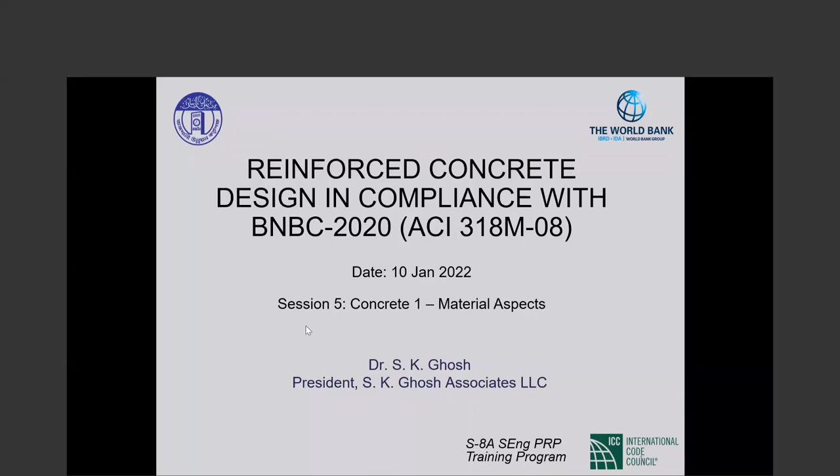Good evening once again. It's 8:05, so let us start. Bodhi has already provided a bit of an introduction, so I'll go forward. He pointed out that the date is 11th of January, not 10th. We had to make some adjustments at the beginning of the program due to circumstances beyond our control. Today is the fifth offering in the series, and we are starting with our reinforced concrete courses. This is a two-part course. I'll talk about the material aspects of concrete and then go on to strength design, the principles of strength design, what it is that we do when we do strength design of concrete.

The ingredients of concrete, as you all know, are cement, sand, stone, and water. Those are the basic ingredients. But for a long time now, we also have admixtures in concrete.

Admixtures used to be classified as mineral admixtures and chemical admixtures. Mineral admixtures will be something like blast furnace slag or fly ash. Those are now called supplemental cementitious materials, and the chemical admixtures are called admixtures. Cement plus the supplemental cementitious materials are called cementitious materials. So what used to be water-to-cement ratio is today water-to-cementitious-materials ratio. However, the code we are talking about, BNBC 2020, as pointed out earlier, is based on ACI 318-08. Back then, it was still water-cement ratio, and that is the terminology you will see as we go forward.

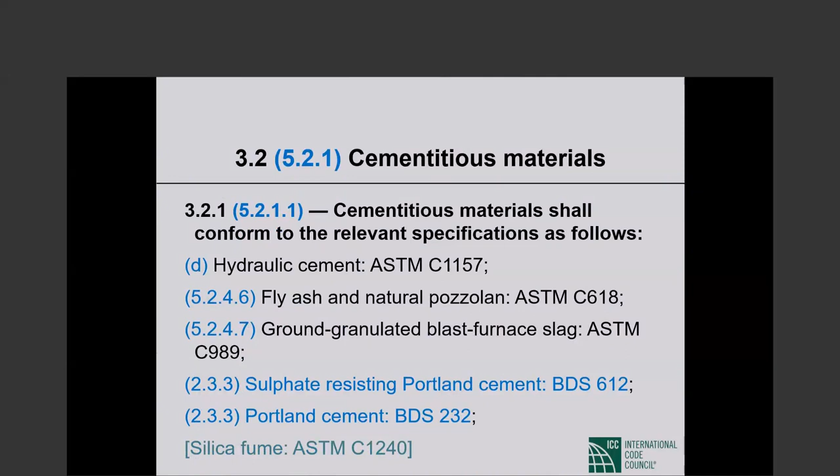So: Portland cement, then blended hydraulic cement C595, hydraulic cement C1157, and the mineral admixtures, among which fly ash, natural pozzolans, and ground granulated blast furnace slag. This is what we are dealing with for concrete making.

The BDS 197 cement comes theoretically, at least, in 5 varieties. CEM 1 is Portland cement, CEM 2 is Portland composite cement, CEM 3 blast furnace cement, CEM 4 pozzolanic cement, and CEM 5 composite cement, meaning cement and pozzolan together. Dr. Akif tells me that pretty much all cement used is CEM 1 and CEM 2. CEM 3 has been used in nuclear power plants, and 4 and 5 are basically not used.

C150 Portland cement — this is the American standard followed throughout the United States and in some parts of the world. C150 cement also comes in 5 types: type 1, type 2, type 3, type 4, type 5. Type 1 is normal, type 2 is moderate sulfate resistant — very important; if there is sulfate in the soil, you may want to go for type 2 cement. Type 3 is high early strength; the name tells you what it is.

Type 4 is low heat of hydration. As cement reacts chemically with water, there is heat generated, and that may cause problems depending on what you are doing and how you are curing the concrete. So in applications like mass concrete, low heat of hydration may be an attraction. And then type 5 is high sulfate resistance — when type 2 Portland cement won't do, you need type 5, with high sulfate resistance.

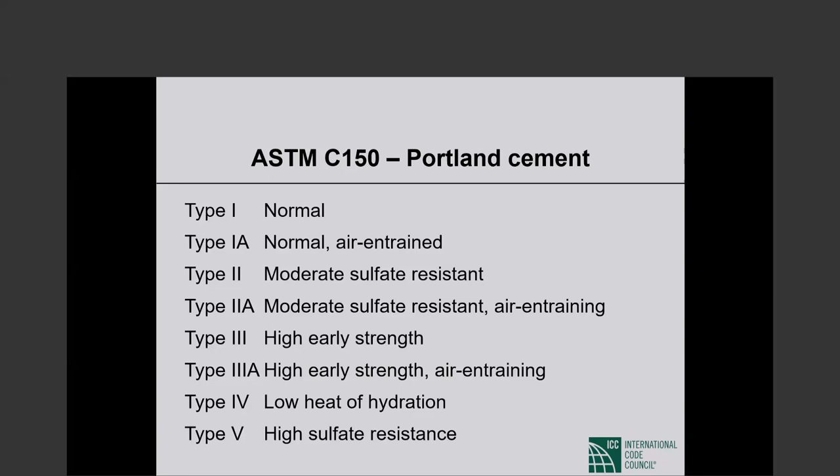That typically is done by adding air entraining admixtures to the concrete mix, but sometimes air is entrained in the cement itself at the cement plant, and that gives us the type 1A, type 2A, and type 3A Portland cements. You don't have to worry about air entrainment to the best of my knowledge.

The blended cements C595: type 1S, which is Portland blast furnace slag cement, and 1P, Portland pozzolan cement. If you have 1S parenthesis 50, that means the blended cement contains 50% slag by mass. And if it is a 1P cement, then within parentheses you may have A for air entraining, MS for moderate sulfate resistant, and so forth. So C595 blended cement is type 1S or 1P with additional information conveyed through the labeling.

1157 hydraulic cements - this is relatively new. C150 goes back a long way, then came 595, and then 1157 is relatively recent.

This is also called a performance spec, meaning the ingredients and so forth are not pinned down, but what properties the cement will deliver is emphasized. So hydraulic cement C1157 can be type GU, general use, HE, high early strength, MS, moderate sulfate resistant, HS, high sulfate resistant, MH, moderate heat of hydration, LH, low heat of hydration. So this kind of mirrors the varieties of C150 Portland cement that we have.

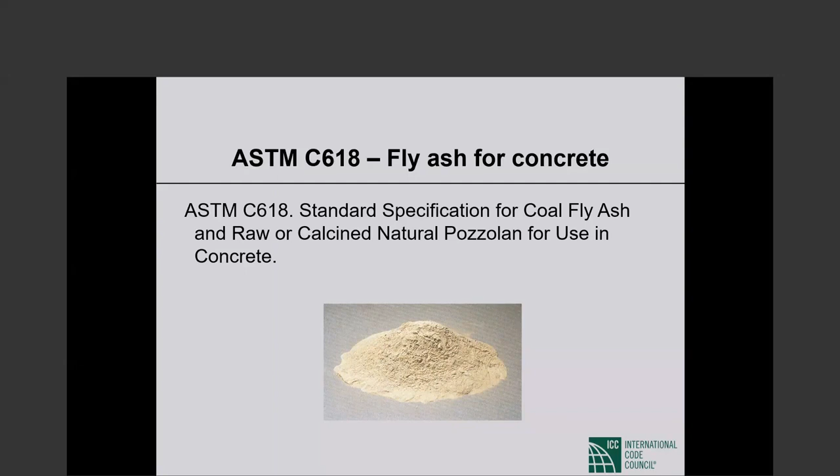Fly ash is probably the most common mineral admixture used in concrete. Fly ash gives the concrete a very dark color, but fly ash itself is not dark, as you see in the picture. The fly ash that you use must comply with ASTM C618, the spec for coal fly ash and raw or calcined natural pozzolan for use in concrete. So C618 for fly ash.

Ground granulated blast furnace slag, again a pretty popular mineral admixture or supplemental cementitious material. The applicable ASTM standard is C989, standard specification for slag cement for use in concrete and mortars.

Both documents state that cementitious materials used in the work, meaning the project, shall correspond to those used as the basis for selecting concrete mixture proportions. So you proportion your mix assuming you are going to use certain supplemental cementitious materials. On the project, you have to use exactly those materials, not something close to those, etc. I think this is understandable upon reading, but this is very, very important.

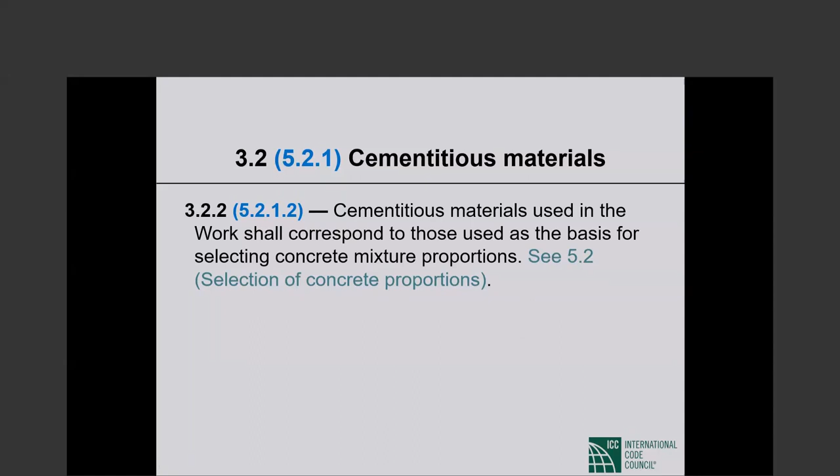Whenever we have text on the slide in this color, that means it is ACI 318 text that does not appear in BNBC 2020.

We go from cement to aggregate. Concrete aggregate shall conform to one of the following specifications. BNBC 2020 says coarse and fine aggregate shall comply with BDS 243 - coarse and fine aggregate from natural sources for concrete.

The US specification for normal weight aggregate is C33, and for lightweight aggregate it is C330. So C33 is normal weight aggregate, C330 is lightweight.

BNBC has an exception that reads: aggregates that have been shown by special test or actual service to produce concrete of adequate strength and durability, and approved by the building official, do not have to comply with ASTM C330. In other words, you may use lightweight aggregate that is not in compliance with C330 if, as the exception says, it has been shown by special test or actual service to produce concrete of adequate strength and durability, and it has been approved by the building official.

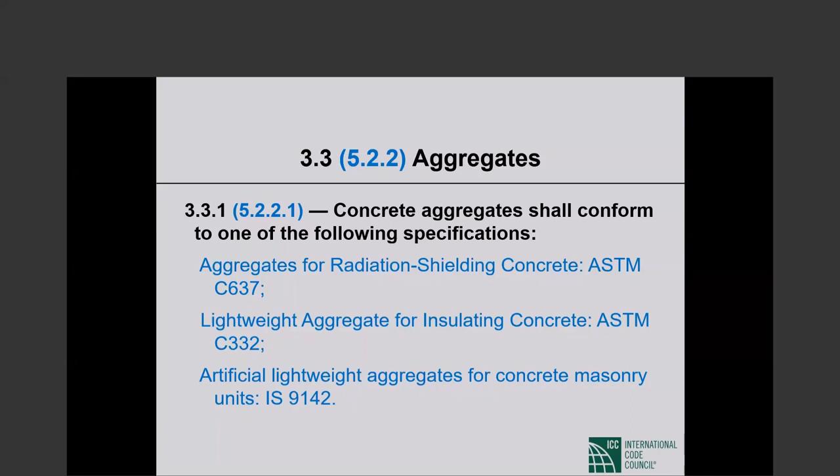I realize that this is not exciting stuff, but these things are important. All the ingredients of concrete have to comply with applicable standards and specifications.

The next slide also has something extremely important. Nominal maximum size of coarse aggregate shall not be larger than... Nominal maximum size - nominal means it is not the measured number, it is what it is claimed to be. So a nominal 3/4 inch aggregate may be smaller when you actually measure its size.

A nominal maximum size of coarse aggregate shall not be larger than 1/5 the narrowest dimension between sides of forms, 1/3 the depth of slab, and 3/4 the minimum clear spacing between individual reinforcing bars or wires, bundles of bars, individual tendons, bundle tendons, or ducts. Tendon would be pre-stressing steel strand, things of that kind.

The whole purpose of this is so that concrete can be placed and there will not be voids in the completed structural member. This is extremely important - if your stone pieces are too big, then voids may very well be created in the concrete because the concrete does not flow, it does not fill all the gaps that need to be filled. So 1/5 the narrowest dimension, etc.

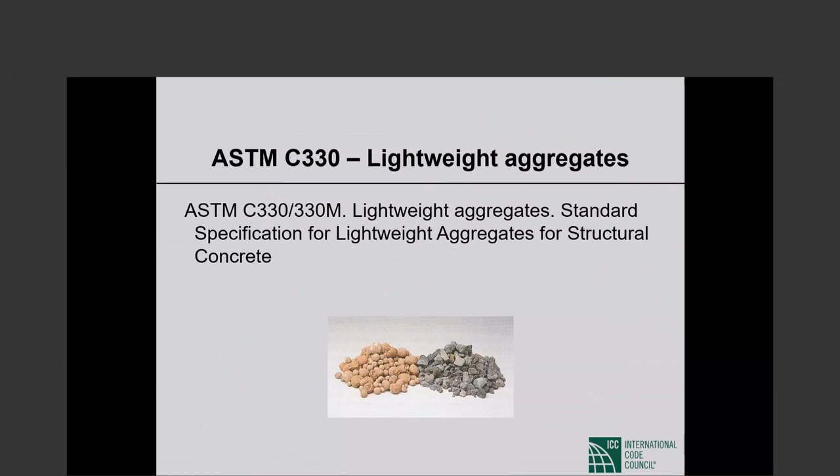C330 is the standard or specification for lightweight aggregate. The full title is Standard Specification for Lightweight Aggregates for Structural Concrete.

Mixing water for concrete is more important than anyone would think. I would say it's extremely important that the water used in mixing concrete be non-problematic water. We now have an ASTM C1602 specification, which is relatively new. I suspect that when ACI 318-08 came out, that specification was simply not available yet.

So that specification is not cited in BNBC 2020. BNBC 2020 says mixing water for pre-stressed concrete, or for concrete that will contain aluminum embedments, including that portion of mixing water contributed in the form of free moisture on aggregates, shall not contain deleterious amounts of chloride ion. So free moisture on aggregates counts as mixing water, which is important. How much chloride is deleterious is given in both BNBC and ACI 318-08 - for that you have to go to section 5.3.3.

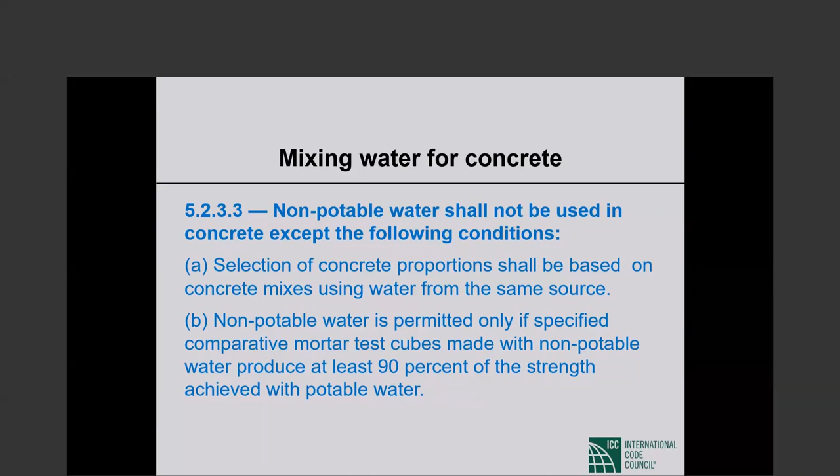What is on this slide, I would emphasize, is extremely important. And item A is also important: selection of concrete proportion shall be based on concrete mixes using water from the same source.

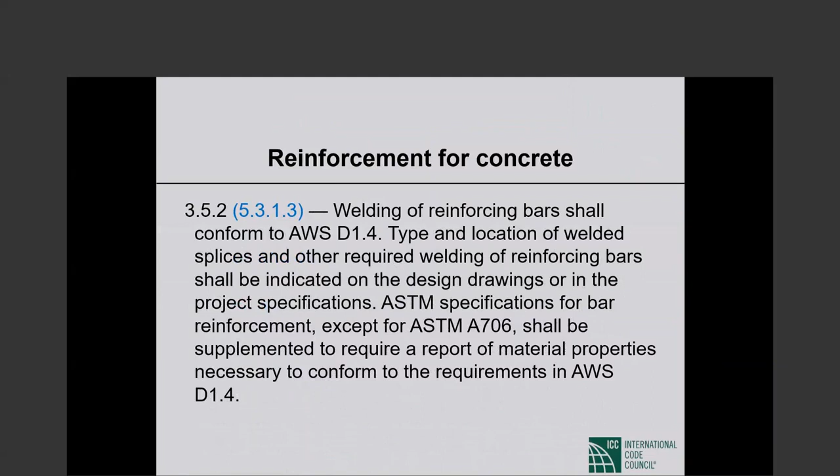Now we go on to reinforcement for concrete. The first item is not reinforcement itself, but welding of reinforcement. Welding of reinforcing bars shall conform to AWS, the American Welding Society, D1.4. I'll let you read the rest of it - it gets a little too much.

Anyway, deformed reinforcement - that's what we always basically use. There used to be plain reinforcement a long time ago, but that has now been discontinued for quite a while, so all reinforcement is deformed reinforcement. The deformations are those ribs that you see on reinforcing bars - it's also called ribbed bars, the deformed bars.

So deformed reinforcing bars shall conform to the requirements for deformed bars in one of the following specifications. The specifications in Bangladesh are BDS 6935-1 and BDS 6935-2. -1 is plain bars, so those are not used; -2 are deformed bars, those are the ones used. So just as I remarked about cement, about reinforcement, basically all reinforcement used in Bangladesh, I understand, is BDS 6935-2.

Now in the US, the vast majority of reinforcement is ASTM A615, but particularly in seismic applications, and increasingly, we have A706 reinforcement. The difference between the two is that A706 is weldable reinforcement, while A615 is not - A615 reinforcement requires special treatment if we are going to weld it. The ingredients of A706 are also tied down much more strictly than those of ASTM A615. So ASTM A615 is standard billet steel, and A706 is weldable reinforcement.

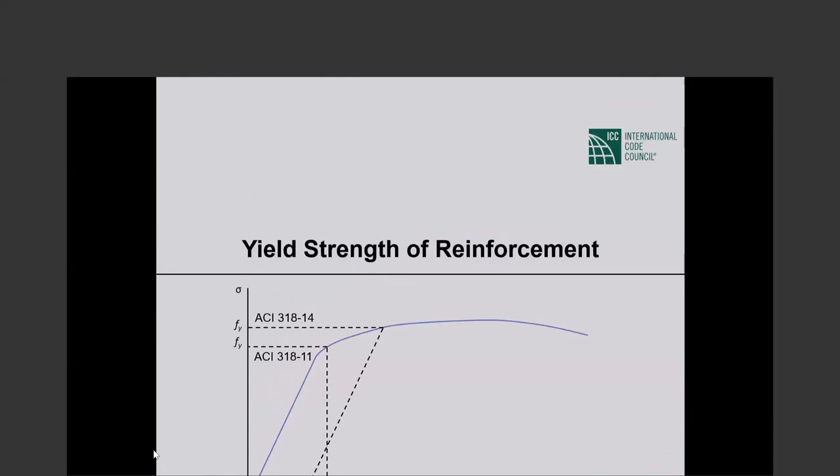So when the yield strength exceeds 60 ksi, the yield strength shall be taken as the stress corresponding to a strain of 0.35%. This change of definition of yield strength becomes important in certain applications, and it may come up in later discussions, but that is not the subject today. However, I do want to point out that this change of definition is made. Yield strength means different things for reinforcing steel up to 60 ksi yield strength and reinforcing steel with yield strength larger than 60 ksi.

Then, in addition to bars, there are bar mats for concrete reinforcement. The applicable ASTM standard is A184. When I have M following the standard number, that simply means metric. Reinforcing bars used in bar mats shall conform to 615 or 706, the two US specs for reinforcement.

Now we go from bar to wire for reinforcement. Deformed wire for concrete reinforcement shall conform to A496. BNBC says shall not be smaller than size D4. I will talk about wire size on the next slide. Shall not be smaller than size D4, which has a nominal diameter of 5.72 millimeter.

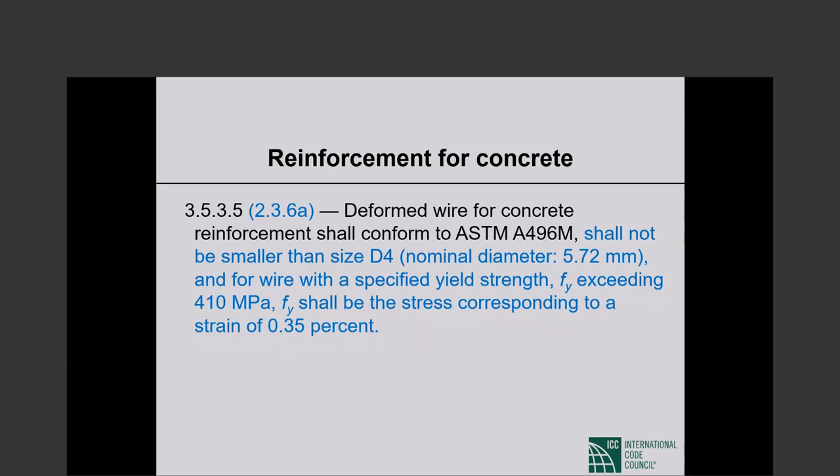Now, wire size, when we say D4, what does it mean? Individual wire size designations are based on the cross-sectional area of a given wire. M stands for metric, W represents plain wire, and D represents deformed wire. The number following the W and the D represents the cross-sectional area of the wire in millimeters square. So D4 means deformed wire having a cross-sectional area of 4 square millimeters. A D10 wire would indicate a deformed wire having a cross-sectional area of 10 square millimeters. So keep that in mind when you come across wire sizes.

Then there is what used to be called welded wire fabric. Now it is called welded wire reinforcement. People who manufacture these do not like the term fabric. Now it is welded wire reinforcement.

So welded wire reinforcement may be made of plain wire or deformed wire. Welded plain wire reinforcement shall conform to ASTM A185, except that for wire with high strength exceeding 60 ksi yield strength, the definition of yield strength changes. Welded intersections shall not be spaced further apart than 300 millimeters, 12 inches, in direction of calculated stress, except for welded wire reinforcement used as stirrups. So there is a maximum spacing between the cross wires, no more than 12 inches.

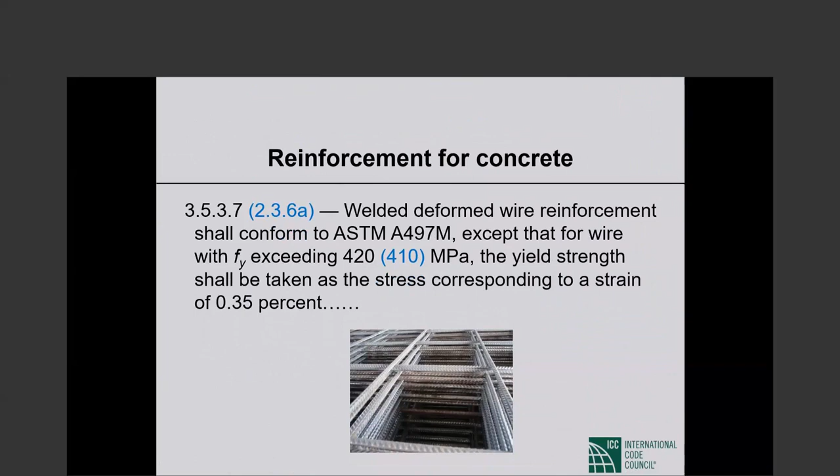Welded deformed wire reinforcement, the spec is A497. Again, the definition of yield strength changes when yield strength exceeds 60 ksi. Welded intersections shall not be spaced further apart than... so if it is plain wire reinforcement, the cross wires cannot be further apart than 300 millimeters. For deformed wire, it is 400 millimeters.

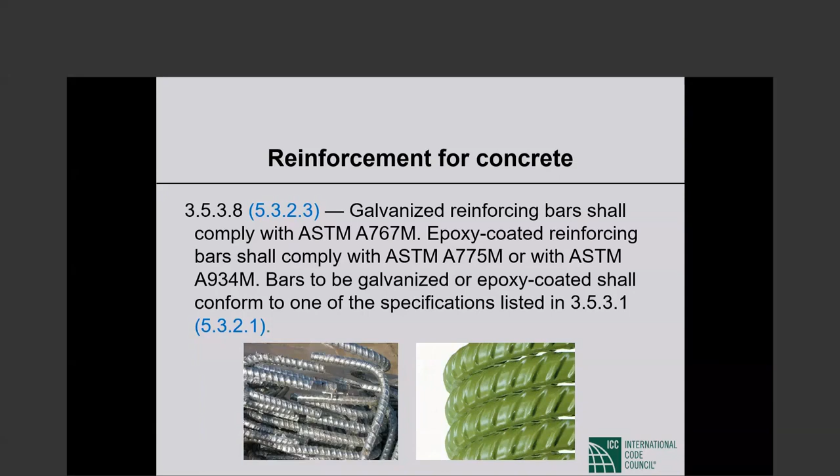Then there is galvanized reinforcing bars, A767. Galvanized means zinc coated, which gives protection against corrosion. There's also epoxy coated reinforcement, A775. Epoxy coating is very popular in highway construction for pavements, and in Bangladesh, apparently in coastal areas for basements and similar structures because of the high risk of corrosion.

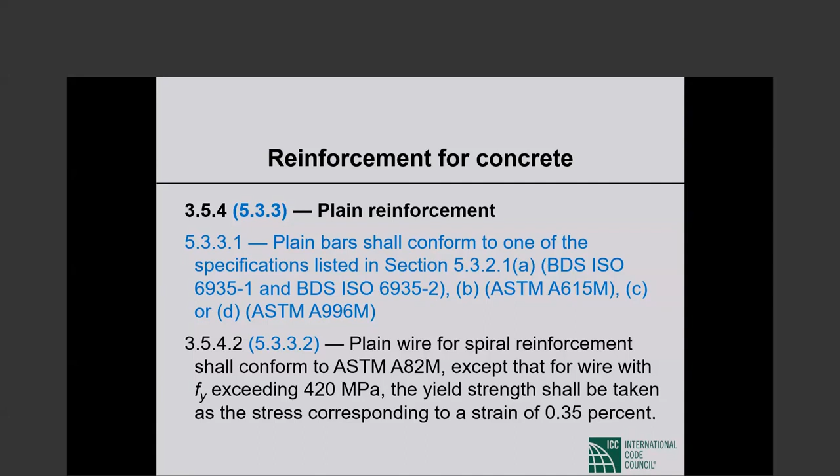Plain wire for spiral reinforcement shall conform to ASTM A82, except that for wire with Fy exceeding a certain value, that definition of yield strength change repeats itself.

This is something I will mention because I consider it extremely important. At some point, I don't remember which module, we will talk about flat plate design. Flat plate is a reinforced concrete slab supported directly on columns. There are no column line beams. Also, there is no local thickening of the slab on top of the columns - those thickenings are called drop panels. Further, there are no column capitals - the column tops are not flared to give us a larger column area at the top. So it is a slab supported directly on columns without any drop panels or column capitals.

In the design of that type of slab, the critical thing is punching shear, two-way shear as opposed to one-way shear, commonly referred to as punching shear. When punching shear stress is beyond the punching shear stress carrying capacity of the concrete, we use punching shear reinforcement, and the most popular kind are now headed studs.

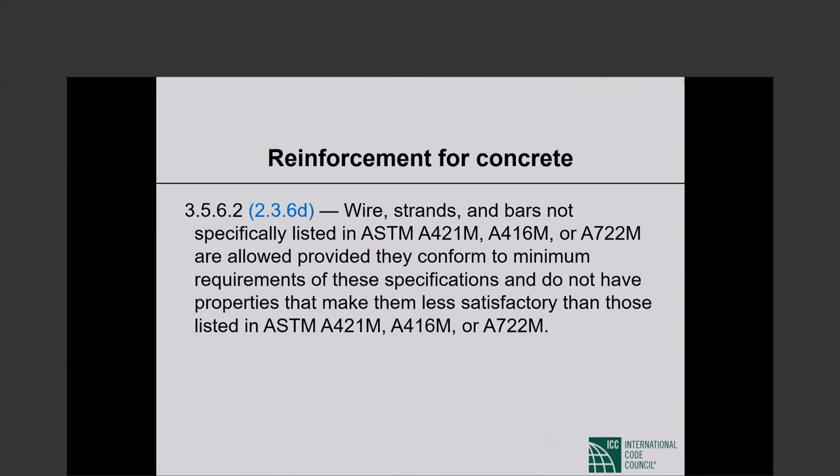Then beyond reinforcing steel and pre-stressing steel, there are times when we use structural steel in concrete, steel pipes, or tubing, and there are specifications given. I don't think I need to or want to take time over those. Those are not common applications, but there are times when you do use structural steel, steel pipe, and tubing in concrete. If you do, there are ASTM specs governing their use.

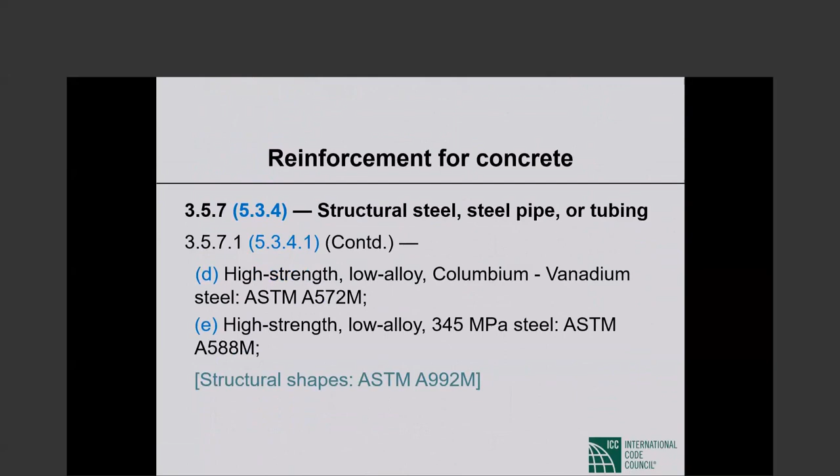Continuing with structural steel, steel pipe or tubing - again, I don't think that I want to spend time on those items, you can look them up. I do want to spend a minute or so on this, as I did on the headed stud shear reinforcement. The color indicates to you that this is in ACI 318-08, not in BNBC 2020.

Steel discontinuous fiber reinforcement for concrete is recognized in ACI 318 as shear reinforcement under very tight controls. This is an increasingly important item, in my opinion, that you should be aware of. Other types of fibers, like carbon fibers, are not recognized by 318.

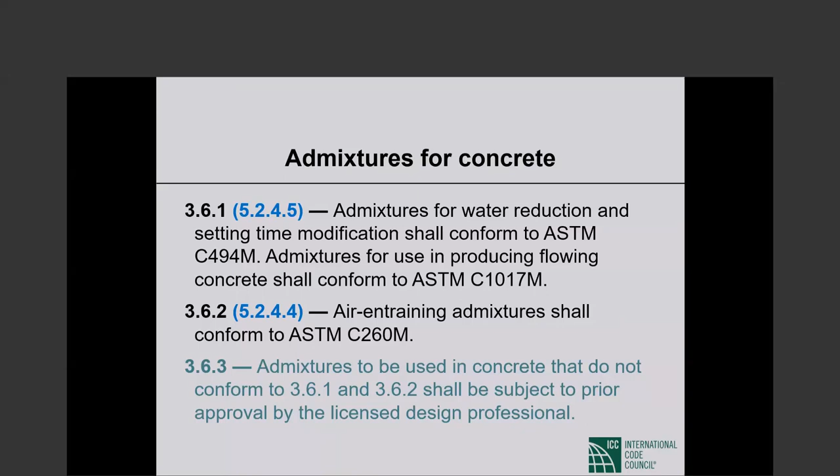Admixtures to be used in concrete shall be subject to prior approval. ACI doesn't require this, but BNBC does. Admixtures shall be subject to prior approval by the building official and conform to the following standards: BDS EN 934-1 or BDS EN 934-2.

Fly ash or other pozzolans won't be called admixture today, it's mineral admixture now, supplemental cementitious material. The spec is C618. Ground granulated blast furnace slag is also cementitious material, ASTM C989. Pigment for colored concrete is C979. BNBC cites those under admixtures for concrete.

Calcium chloride: admixtures containing chloride from sources other than impurities in admixture ingredients shall not be used in pre-stressed concrete, in concrete containing embedded aluminum, or in concrete cast against stay-in-place galvanized steel forms. This is extremely important. Wherever you have potential corrosion, where you absolutely need to make sure there will be no corrosion problem, you have to avoid calcium chloride in your admixtures.

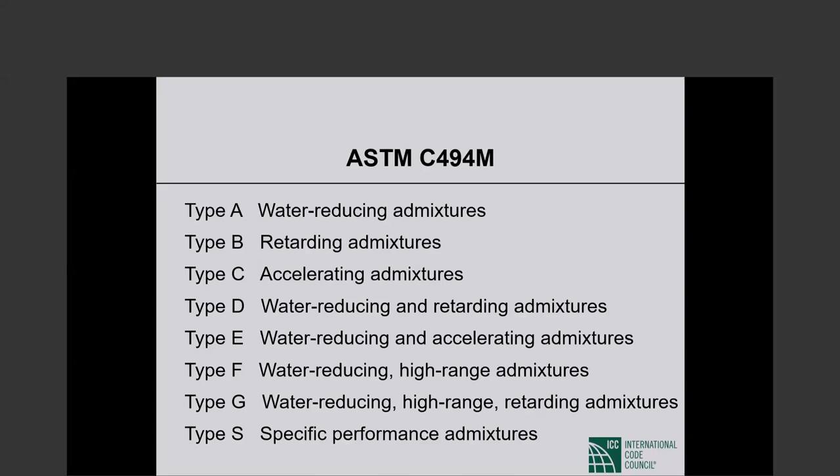High range means it gets close to what was called the self-consolidating or flowing concrete, giving you kind of flowing concrete. So water reducing high range admixtures, water reducing high range retarding admixtures, and then specific performance admixtures: A, B, C, D, E, F, G, and S, various types of C494 admixtures used.

BNBC cites BDS EN 934-1. Those are admixtures for concrete, mortar, and grout; Part 1 is common requirements. EN 934-2, admixtures for concrete, mortar, and grout, Part 2, talks about concrete admixture definitions, requirements, conformity, marking, and labeling.

Storage of materials: cementitious materials and aggregates shall be stored in such a manner as to prevent deterioration or intrusion of foreign matter. Storage is extremely important, preventing deterioration and intrusion of foreign matter. These things, when you read them, don't seem like much, but they are very, very important requirements.

Durability requirements are again extremely important. Durability is like longevity in people: how long is your concrete going to last, how long is it going to be serviceable and serve the purpose for which it was installed. For concrete intended to have low permeability, so-called watertight concrete, when exposed to water, the water cement ratio shall not exceed 0.5.

When we talk about durability, there are typically four aspects. Freeze-thaw resistance, which is kind of moot in Bangladesh, so you have three considerations: resistance to sulfate attack, water tightness or permeability, and corrosion protection. So sulfate resistance, corrosion protection, and permeability or lack of it, impermeability.

Those are the three considerations. So BNBC starting with watertight concrete, intended to have low permeability when exposed to water. What you need to do is keep the water cement ratio—today it would be called water cementitious materials ratio, and I think that's the way you should practice it, because that makes more sense—shall not exceed 0.5. That is a pretty generous number, not a very tight restriction.

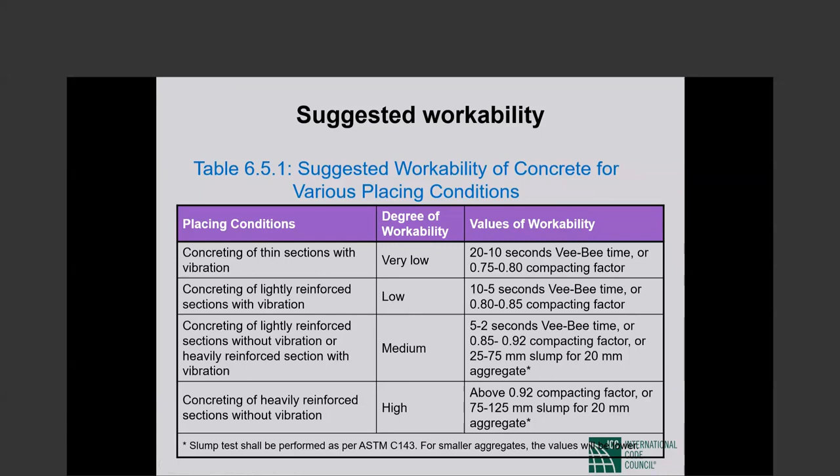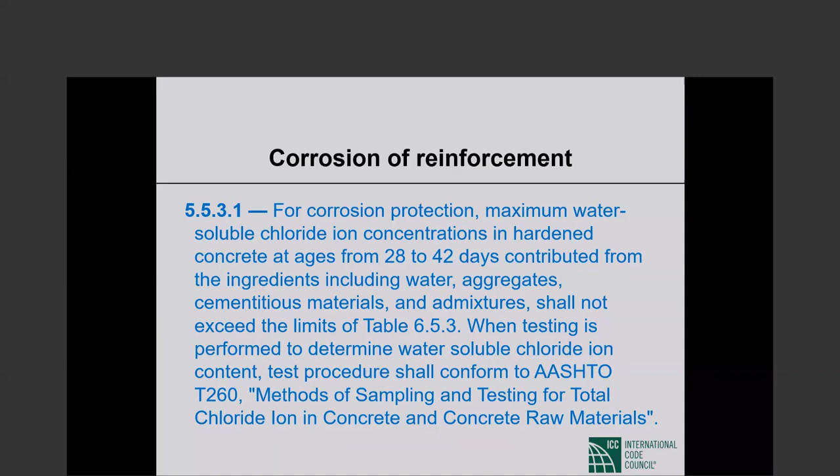There is a corrosion problem in most of the country, particularly in coastal areas. Chlorides cause the corrosion, and the chlorides from all sources have to be severely limited. When testing is performed to determine water-soluble chloride ion content, the test procedure shall conform to AASHTO T260, that I had in mind when I was talking a minute ago.

When reinforced concrete will be exposed to brackish water, seawater, or spray from these sources, requirements of section 5511 and 5512—the first two things I showed you for water cement ratio or concrete strength—apply. So if your concrete is going to be exposed to brackish water, seawater, or spray, there is a limitation on water cement ratio that we went over; I am not going to spend the time going back over it. There is also a minimum cover requirement in section 818, chapter 8, which we will come to. So both are required: the limitation on water cement ratio and adequate cover on reinforcement. The maximum chloride ion content, as I said, is given in a table, and this gives you the maximum chloride ion content depending upon your application.

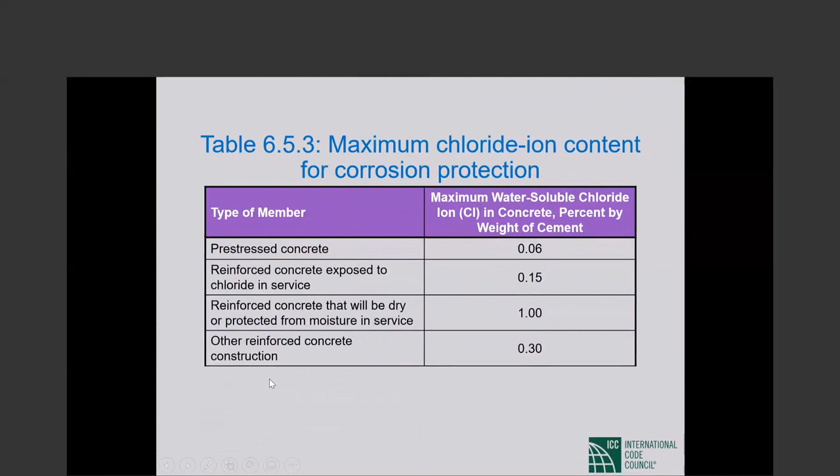The minimum concrete strength I mentioned for structural use of reinforced concrete is not particularly for corrosion protection—this is across the board. Minimum concrete strength for structural use of reinforced concrete in BNBC is 20 megapascal, Newton per square millimeter. That's about 3000 psi. However, for buildings up to 4-story, the minimum concrete strength may be relaxed to 17 megapascal, about 2500 psi. So those are the very minimum concrete strengths.

In IBC, it is 2500 psi across the board. We don't go up to 3000 except in some cases, like corrosive environments. This is important stuff for Bangladesh, which is why I kept it here.

The cover that was being referenced from earlier: if a thickness of cover for corrosive environment or other severe exposure conditions greater than the concrete cover specified in such and such section is required, such greater thickness shall be specified. So there are standard cover requirements in 8171 to 8176, but if a greater thickness is required for corrosive environments or severe exposure, that greater thickness shall be specified.

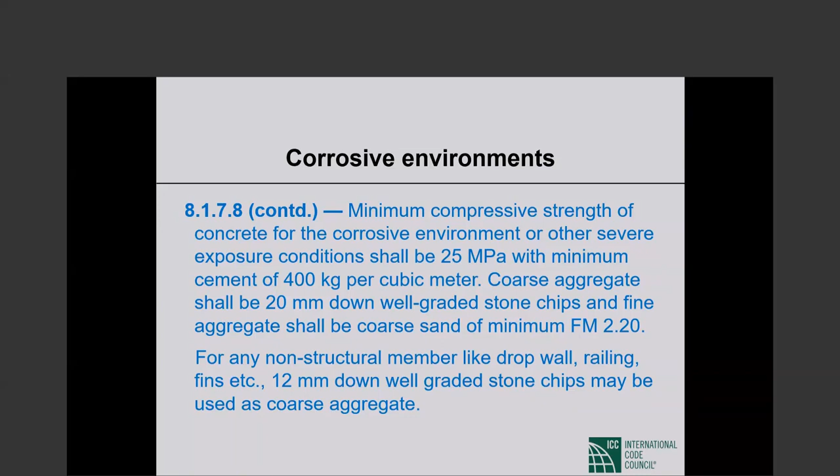Coarse aggregate shall be 20 millimeter down. I'll let you read the rest because all the details won't register, but it's extremely important that you have these requirements on the books, and following them is in your interest. Use of brick chips as coarse aggregate is strictly prohibited for corrosive environment or other severe exposure conditions. Water cement ratio shall be 0.4 to 0.45. Potable, drinkable water shall be used for all concreting—that exception goes away in corrosive environments.

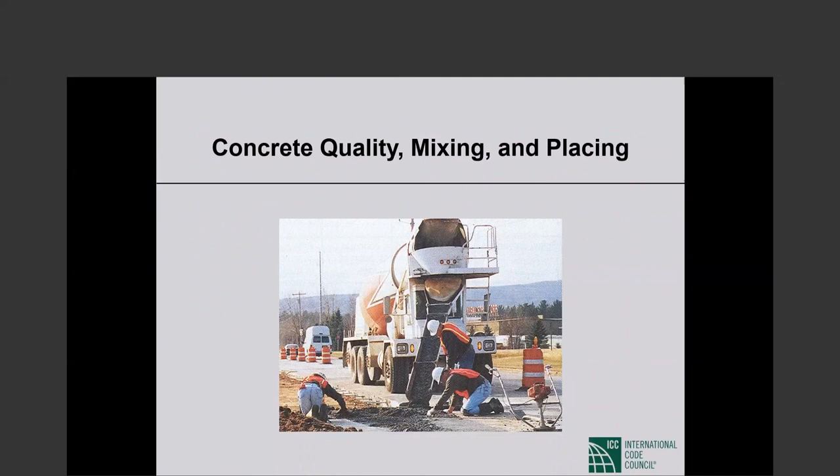Okay, concrete quality, mixing and placing. I think I'm beginning to run late, so some of this stuff probably...

Anyway, concrete shall be proportioned to provide an average compressive strength. So if specified compressive strength is 20 MPa, whatever, you have to set a required strength that is higher than that—that would be F sub C R prime, R for required. Concrete shall be produced to minimize the frequency of strength tests below F sub C prime, which is the specified value.

So you will set a target value for proportioning that is higher, F sub C R prime. The idea is that concrete shall be produced to minimize the frequency of strength tests below F sub C prime. For concrete designed and constructed in accordance with the code, F sub C prime shall not be less than 17 MPa, which we have seen before.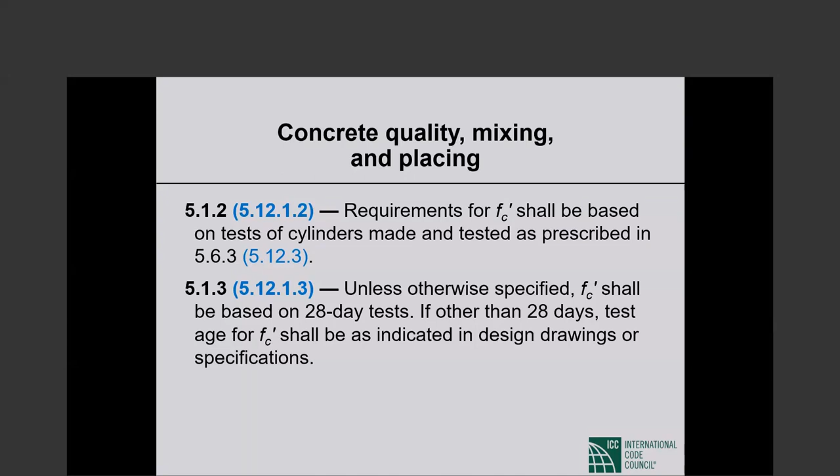The requirements for F sub C prime shall be based on tests of cylinders made and tested as prescribed—there's a section that tells you about the cylinder size and so forth. Unless otherwise specified, F sub C prime shall be based on 28-day tests. If other than 28 days, the test age for F sub C prime shall be as indicated in design drawings or specifications. That's a choice the engineer has, but if you want strength at 42 days rather than 28 days, that has to be on your drawings or specs.

The only thing in BNBC carried over from 318 is that splitting tensile strength tests shall not be used as the basis for field acceptance of concrete. It has to be compressive strength, not the split tensile strength.

Proportions of materials for concrete shall be established to provide workability and consistency to permit concrete to be worked readily into forms and around reinforcement under conditions of placement without segregation and bleeding, and to meet requirements for applicable exposure categories of chapter 4 - the durability requirements. So you have to comply with strength requirement, durability requirement, but you also have to think of workability - the concrete has to be able to go where it needs to go. That is extremely important. Workability, durability considerations, and strength - all three are important in proportioning.

Where different materials are to be used for different portions of proposed work, each combination shall be evaluated. Concrete proportions shall be established. So you can proportion concrete on the basis of field experience or trial mixtures or both, or you can proportion concrete without field experience or trial mixtures, and it shall meet the applicable requirements.

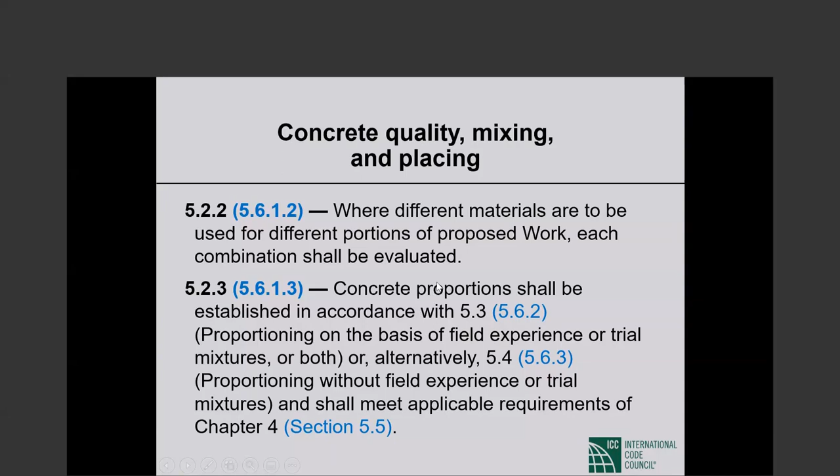All of this stuff has now been deleted from ACI 318, but it used to be in older editions, and they are in BNBC 2020. We have deleted them from 318 because the engineer does not typically deal with proportioning - it is done at the ready-mix concrete plant. So we have stripped ACI 318 of all this stuff.

Proportioning on the basis of field experience and/or trial mixtures, proportioning by water cement ratio when you don't have the basis of field experience or trial mixtures. If you proportion by water cement ratio, then there is a strength reduction that is specified. So all those details are in BNBC 2020.

Evaluation and acceptance - here we talk about testing, frequency of testing, lab cure specimens, field cure specimens, and investigation of low strength test results.

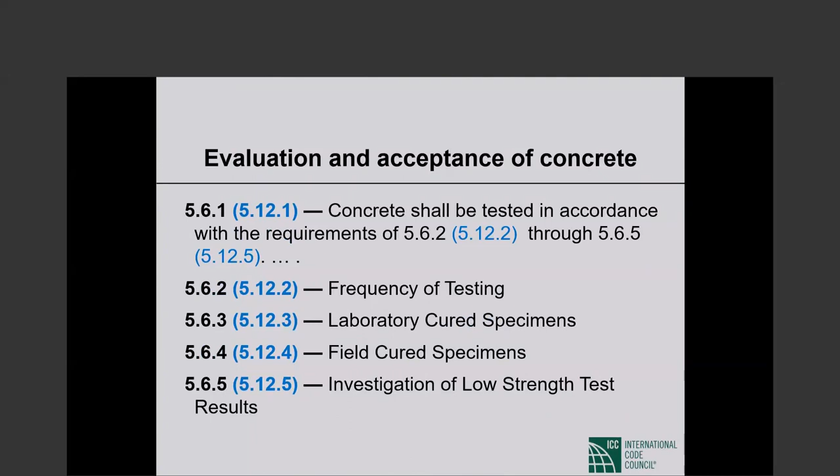Steel fiber reinforced concrete is in ACI 318-08, not in BNBC 2020, so I will not talk about these.

There are also major requirements concerning construction aspects, which I will not talk about because of time limitation, but everything about concrete - if you want the right product, if you want a properly constructed concrete structure - all of these items are important.

The mixing of the concrete, not just the proportioning, but the mixing, and the conveying - typically these days a truck mixer comes from the concrete plant and arrives at the job site. Then the conveying is typically through pumps in the United States. And then depositing - how do you put it in place from the head of the pump to where the concrete ultimately belongs?

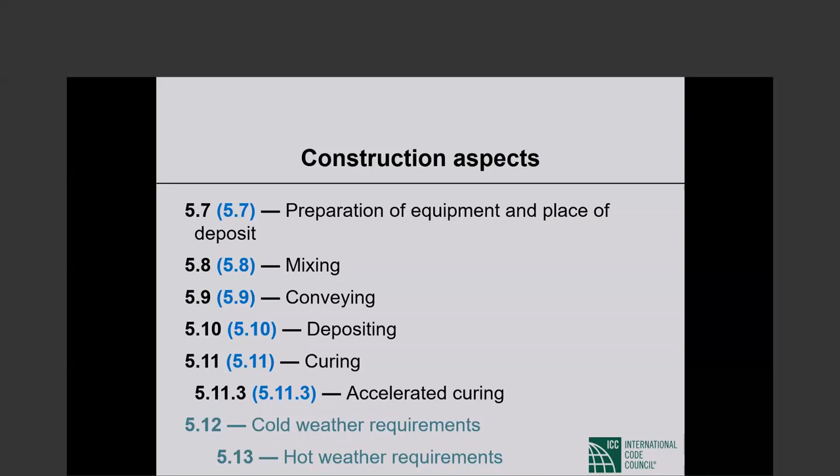After you have placed the concrete, curing is absolutely critical. There is nothing more important than curing of the concrete - you cannot let the concrete dry too quickly, as that will lead to cracking and weaknesses. These are all major topics I do not have time to discuss, but please understand them to be important and follow not only the code requirements but also sound practice.

Formwork, embedments, and construction joints - there are requirements given, and this should be taken seriously: design of formwork, removal of forms, shores, and reshoring. Shores are the posts and things that support the forms. Reshoring is when you remove the forms after concrete has gained sufficient strength, but at that point you still have to keep the slabs supported. So you remove the shores to remove the formwork, but then you reshore - you put the post back, supporting the slab directly. This also covers embedments in concrete and construction joints.

Okay, so that brings me to - I probably don't have a very good sense of the time each segment should take, because I haven't done this before. So I have an hour and 10 minutes. It should be sufficient, I would think.

Okay, so this is now the strength design method. Two design philosophies have long been prevalent: allowable stress design and strength design. The strength design, as we call it today, was initially called ultimate strength design, and the word ultimate eventually dropped out - I don't remember from what point onwards we have called it just strength design. So ASD, or allowable stress design, and strength design are the two philosophies.

Allowable stress design was the principal method used from the early 1900s - that's where we started - until the early 1960s. Okay, so even somebody of my vintage, we have really not done ASD of concrete, only allowable stress design of other materials.

Steel was the next material to abandon allowable stress design - I won't be able to tell you the exact year, but it was in the 80s in the United States. Masonry is in the process of switching now - 5 years ago it was mostly allowable stress design, some were switching to strength design. Today I think it's 80-85% strength design, the remaining ASD. Wood is the material where ASD is still common, and wood is a very important material here in the United States. Anyway, so ASD was the principal method until the early 60s.

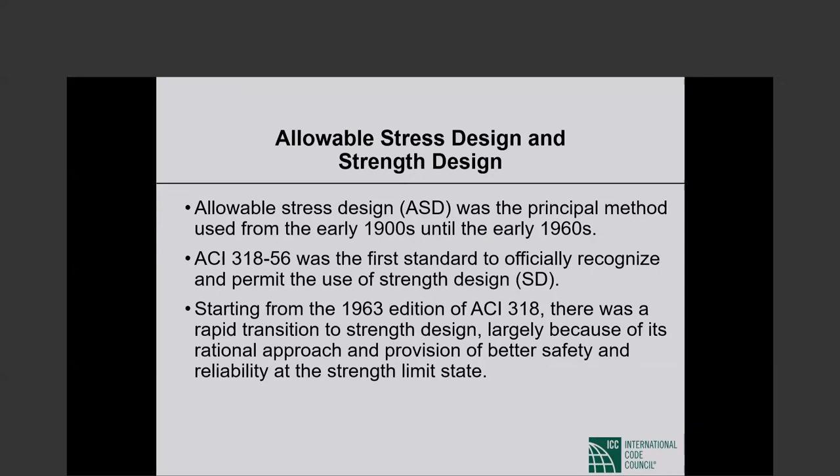1963 treated both ASD and strength design on an equal basis. In 1956, strength design was introduced in an appendix. By 1963, both ASD and strength design were in the main body of the code. Large portions of ASD dealing with bond, shear, diagonal tension, and combined axial load and bending were modified to reflect behavior at nominal strength.

By 1963, and then there was 1971, it remained the same as 1963, but by 1977, the allowable stress design was moved to an appendix. So strength design came in an appendix, was introduced in an appendix in 1956. 1963 and 1971 both remain side by side in the main body of the code. In 1977 ASD went to an appendix, and in 2002 it was gone. The appendix with ASD was deleted from 318.

That is the brief history. So from 2002 onwards, we simply do not have allowable stress design of concrete. Strength design philosophy is very simply: required strength.

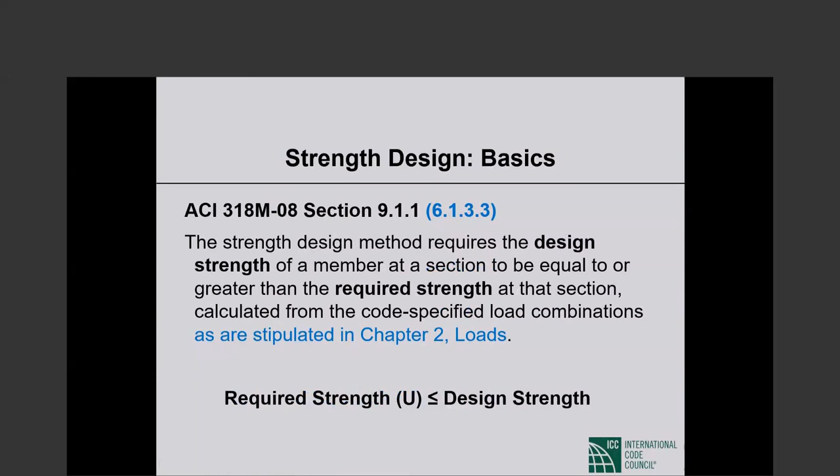What is required strength? So there are service loads. Let's start there. Service loads are the loads specified by the building code which a structure is expected to support under normal usage. There are service loads and there are abnormal loads. We are talking about service loads specified by the building code which a structure is expected to support under normal usage. So service loads, so many pounds per square foot of live load, that would be a service load.

We go from service load to service load effect. We have a structure. If you have a structure, there are dead loads already acting, the weights of the structural members, and then let us say we have live loads acting on the slabs. Now we analyze the structure elastically, and that gives us bending moments, shear forces, axial forces in the various structural members. These are internal forces caused by the external loads.

Every word I'm saying is important, please listen very carefully. So the service loads are imposed on the structure. We analyze our structure elastically under the service loads. We calculate bending moments, shear forces, axial forces in our structural members. Those are internal forces caused by the external loads, also called load effects. So there are loads and load effects: the externally applied loads and the internal forces caused by the externally applied loads.

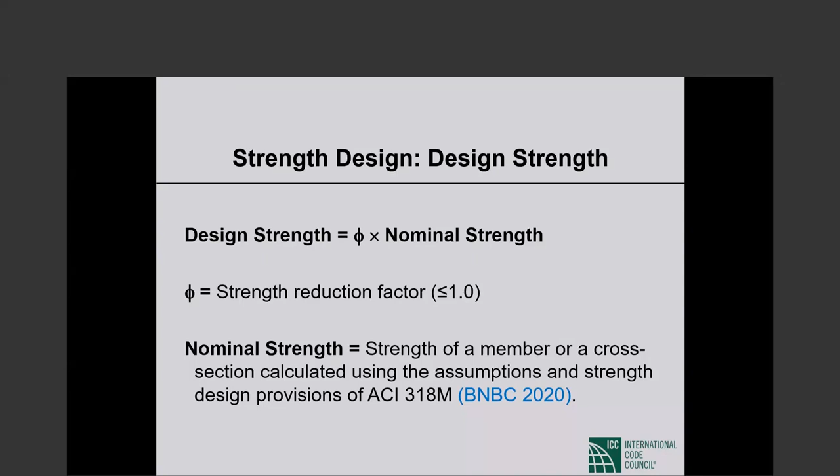That nominal strength is discounted by a strength reduction factor phi. The notation for nominal bending strength is M sub n. Phi times M sub n would be the design moment strength. So design strength is a strength reduction factor times nominal strength.

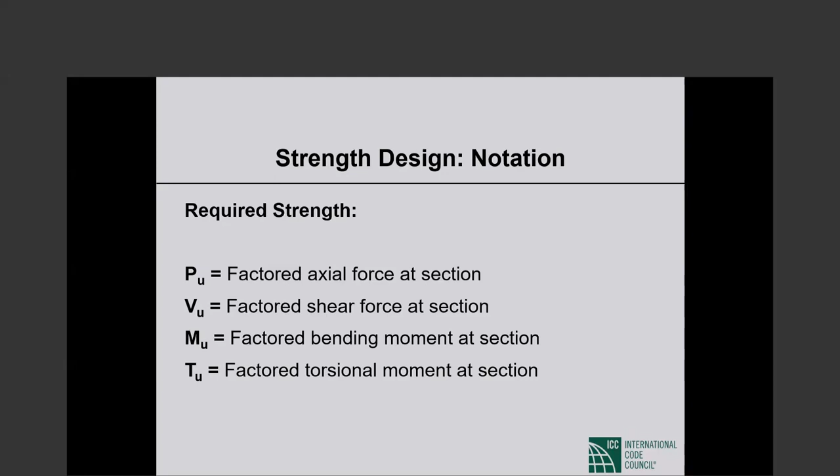Both nominal strengths and phi factors for reinforced concrete members are determined in accordance with BNBC 2020 or ACI 318. The required strength is always sub U - this notation is extremely important, you have to stick with it. Required strength is very different from design strength. Required strength is the demand, design strength is the supply. The demand side: required factored axial force P sub U, required shear strength V sub U, required moment strength M sub U, required torsional strength T sub U.

The supply side is nominal strength times phi. The nominal strength is sub N - if axial load, P sub N; if shear, V sub N; if moment, M sub N, and so forth. Design strength is phi times P sub N, phi times V sub N, phi times M sub N.

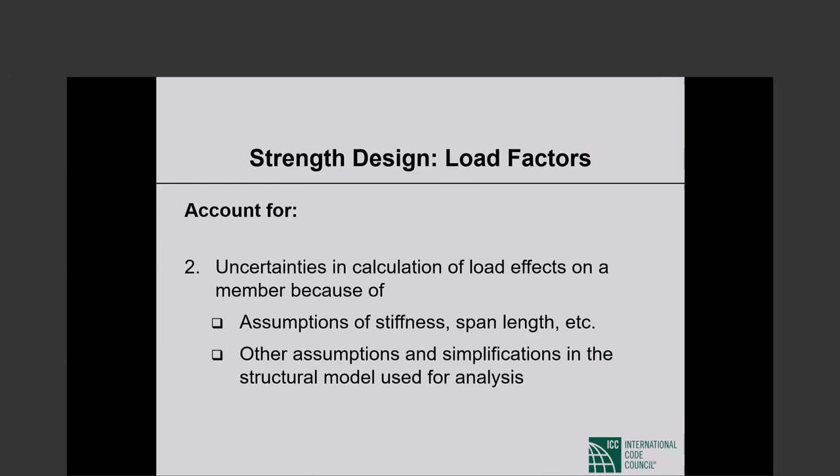Why do we apply load factors? Because of probable variation in specific service loads due to variation in member sizes, variation in material densities, structural and non-structural alterations, and degree of accuracy in load determination. Also, uncertainties in calculation of load effects on a member. We go from load to load effects by analysis, and in that analysis we make assumptions of stiffness, span length, and other simplifications in the structural model. There are uncertainties in all of those - we assume a particular stiffness which may be different. This is why we need load factors.

Strength reduction factors - why do we discount the nominal strength? Probable variation in material strength because of quality control, the effect of testing speed. I don't know how many of you realize that if you test something at high speed, you get higher strength than if you test the same thing at lower speed. There's also the difference between in situ strength, in-place strength, and specimen strength. We test cylinders which are representative of in situ strength, but it's not exactly the same. There's also stress due to creep and shrinkage.

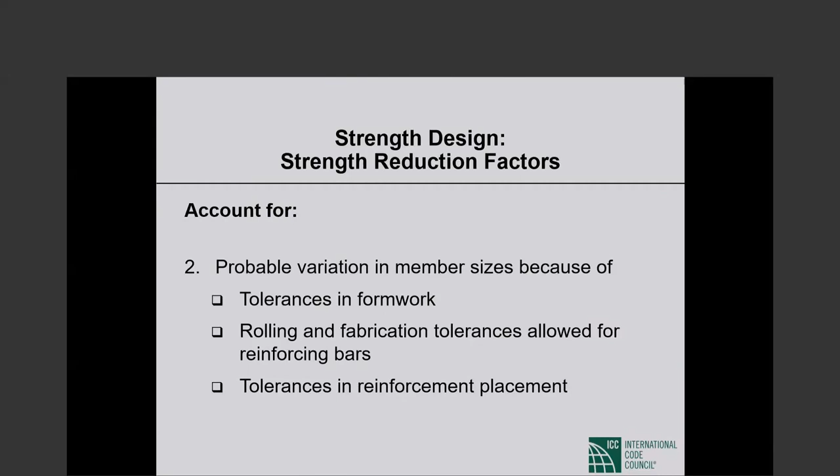Probable variation in member sizes because of tolerances in formwork, rolling and fabrication tolerances allowed for reinforcing bars, and tolerances in reinforcement placement. The strength reduction factor also accounts for various design assumptions and simplifications that cause the design behavior of structural members to deviate from actual behavior, and finally, consequences of failure. When a column fails, it is catastrophe. When a beam fails, it may not be a big deal - beams can be much more easily repaired than columns. So columns have to be assigned a significantly lower phi factor than beams.

So up to that point is the basic strength design we've had since '63. From '56 to '63 significant changes were made in strength design, but from '63 onwards, details have changed but we stayed basically with the same strength design. Then came unified design provisions in relatively recent times - a modified version of the strength design method was first introduced in ACI 318-95.

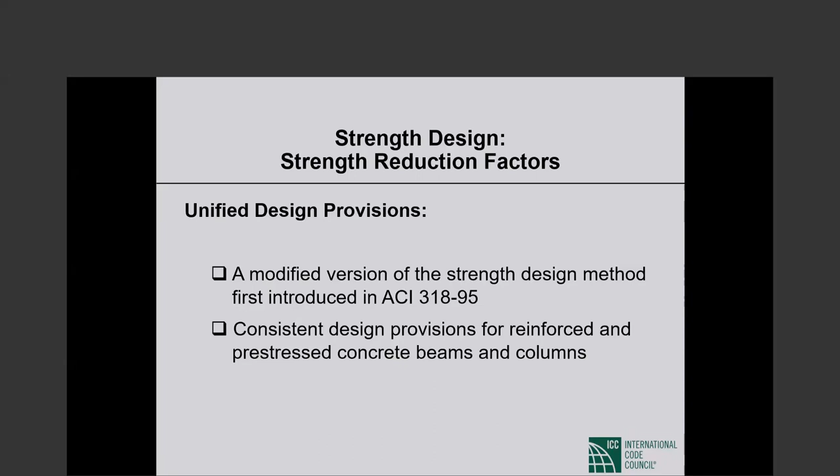Also, pre-stressed concrete and reinforced concrete should be viewed as two extremes of a continuum, which is partially pre-stressed concrete. You can combine reinforcing steel and pre-stressing steel in the same member, and depending on how much of the load effect is resisted by the pre-stressing steel versus reinforcing steel, you can have behavior ranging from that of a reinforced concrete member to that of a pre-stressed concrete member. So it should be a continuum - there should not be any fundamental difference in how we treat reinforced versus pre-stressed concrete members. That was the idea behind unified design.

Okay, so under this unified design introduced in 318-95, the phi factor became a function of the so-called net tensile strain, a very important term now, epsilon sub t. So phi is now a function of the net tensile strain epsilon sub t.

Net tensile strain is the tensile strain at nominal strength, exclusive of strains due to pre-stress, creep, shrinkage, etc. Okay, let me do it this way. Nominal strength.

Something very fundamental to ACI 318 from the beginning of strength design has been that a section attains its nominal strength when the extreme compression fiber concrete strain reaches a value of 0.003. I will repeat - every bit of what I'm saying now is extremely important for you to understand. ACI 318 has only one definition of nominal strength. A section is considered to have attained its nominal strength when the extreme compression fiber concrete strain reaches a value of 0.003.

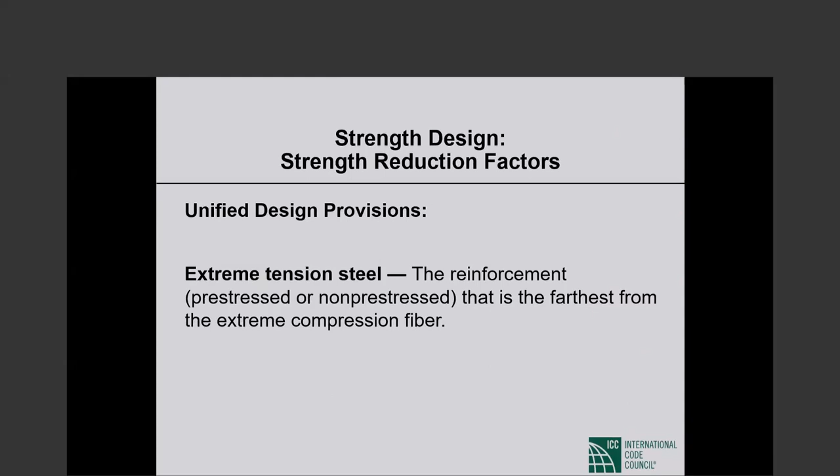Now, when I said strain in the reinforcing steel, it is actually strain in the extreme tension steel. What is extreme tension steel? The reinforcement that is the farthest from the extreme compression fiber. Very simple. So net tensile strain is the strain in the extreme tension steel corresponding to a strain of 0.003 in the extreme compression fiber of the concrete.

Why? This unified design that is in ACI 318 was the contribution, let me say, of Bob Mast, Robert Mast, who was truly an outstanding engineer. He died relatively recently - he lived to his late 90s and was very sharp until the end. One of the smartest engineers that has been my privilege to know. Bob Mast...

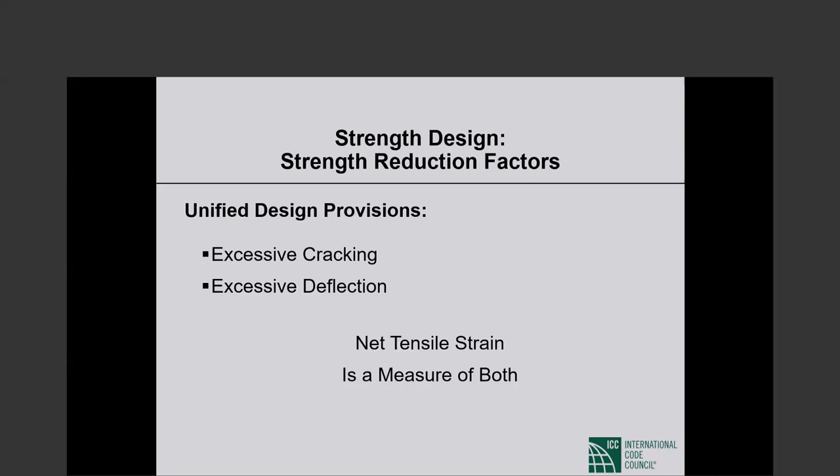went for net tensile strain as the basis of his unified design because it is indicative of both excessive cracking and excessive deflection. Let me go one step back. Concrete, a properly designed concrete member should give you warning of failure. It should not fail all of a sudden. This is why we limit the amount of tension reinforcement in a concrete member, to have warning of failure. The warning comes in the form of cracking and deflection - both are related. When concrete deflects, it cracks, and when it cracks, the cracking causes the deflection. The net tensile strain is indicative of both excessive cracking and excessive deflection. This is why he thought it was a suitable quantity to anchor the whole thing on.

Now, in these unified design provisions, we talk about net tensile strain, and then we talk about compression controlled strain limit, the net tensile strain at balanced strain condition. Balanced strain condition means the reinforcement yields at precisely the same moment that the concrete compression fiber reaches a strain of 0.003. So the compression control strain limit is basically the yield strain of the reinforcement. Compression control strain limit is the net tensile strain at balanced strain conditions. Balanced strain conditions mean the extreme tension steel yields at the same instant that the extreme compression fiber reaches a strain of 0.003.

Then we talk about compression control and tension control sections. We have talked about net tensile strain, we have talked about compression controlled strain limit. Now we are talking about compression control section, and next you will see tension control section.

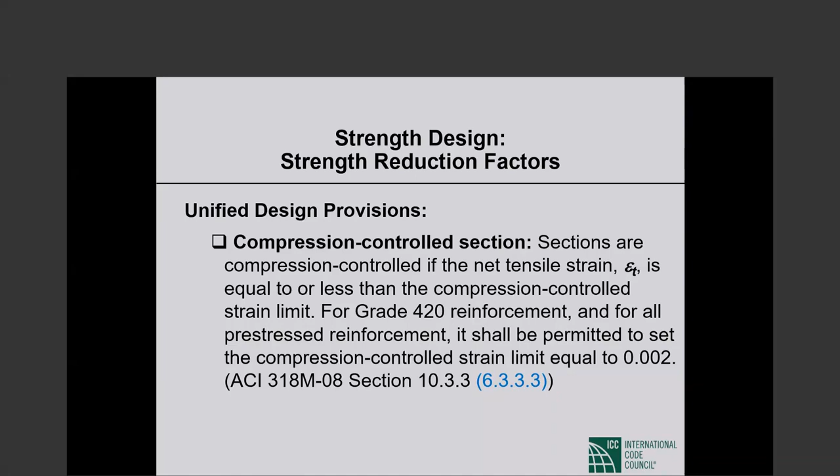For grade 420 reinforcement, that's grade 60 in our case, and for all pre-stressed reinforcement, very importantly, it shall be permitted to set the compression control strain limit equal to 0.002, the yield strain of grade 60 reinforcement. So when we talk about compression control strain limit, that limit is typically 002 if we are dealing with grade 60 reinforcement. That is changing these days, but for all practical purposes, in most applications, the compression control strain limit is 002, and a compression control section is a section where epsilon sub t, the net tensile strain, is less than or equal to 002.

Tension controlled section. Sections are tension controlled if the net tensile strain is equal to or larger than 0.005. 002 and less is compression controlled, 005 or more is tension controlled. Epsilon sub t is greater than or equal to 005.

So there are compression control sections, tension control sections, then there are transition sections. Compression control sections, net tensile strain 002 or less. Tension control sections, net tensile strain 005 or more. Transition sections are sections where epsilon sub t is between 002 and 005, as simple as that.

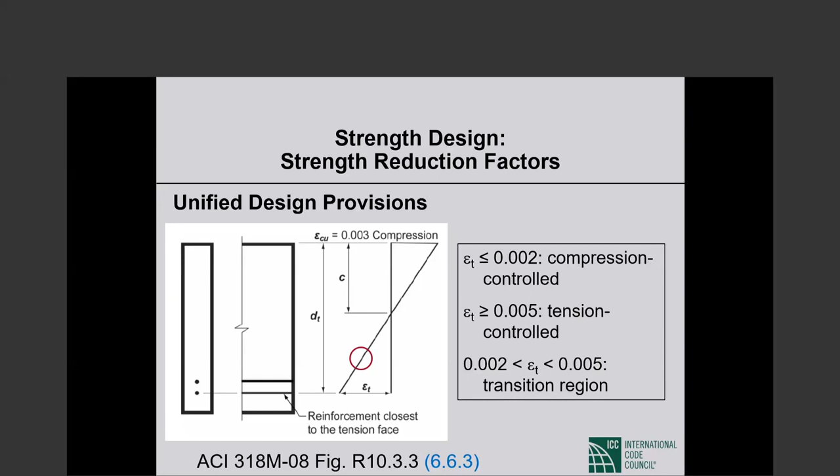So in picture, you see epsilon sub t defined just as before, the strain in the extreme tension reinforcement corresponding to a strain of 0.003 in the extreme compression fiber of the concrete. If epsilon sub t is less than or equal to 002, we have a compression control section. If epsilon sub t is larger than or equal to 005, we have a tension control section. In between, we have a transition section.

Okay, now the phi factors. Tension control sections, phi is 0.9. Notice we don't say phi of 0.9 for flexure or for beams, it is for tension control sections, 0.9. If it is a compression control section, spirally reinforced member, 0.75. If it is not spirally reinforced, the phi is 0.65. Notice again, we don't say phi of 0.75 for columns, it's compression control sections that are spirally reinforced.

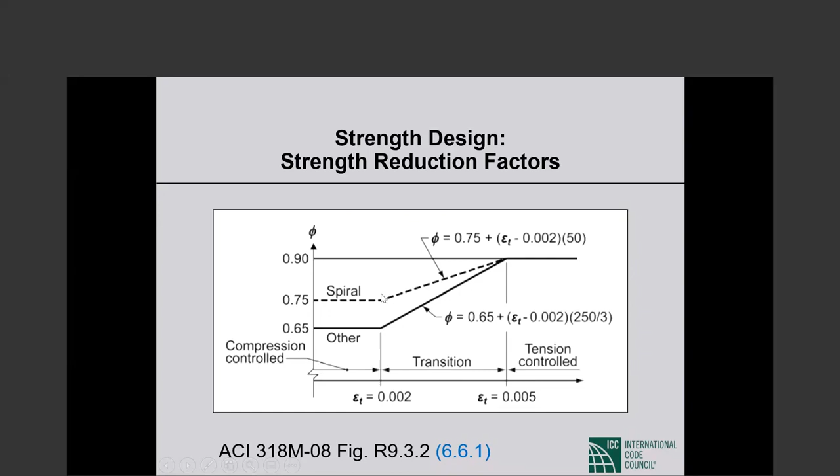In this text is better shown by this picture. So for tension control sections, epsilon sub t of 005 or more, phi is 0.9. For compression control sections, epsilon sub t of 002 or less, phi is 0.65 or 0.75. In between, for transition sections, we go on a straight line. Phi is interpolated linearly between the lower value and the higher value, 0.65 and 0.9 or 0.75 and 0.9, as simple as that. Linear interpolation between the lower value and the higher value.

Next is something that is in BNBC, not in ACI 318. It shall be permitted for compression control sections, the following optional, more conservative alternative values of strength reduction factor phi, where less controlled construction environment justifies such selection according to engineering judgment of the designer. Spirally reinforced, you use 0.7 instead of 0.75, and non-spirally reinforced 0.6 rather than 0.65.

I think this is an unnecessary provision because you can always go lower than the code. As I emphasized, I think the very first time we met, code sets minimum requirements. You can always go above the code. So when the code says phi of 0.75, you can always use a lower phi factor as the designer. The code doesn't have to give you specific permission.

So why this lower phi value for compression control sections? Compression control sections, such as columns, are assigned lower phi factors than tension control sections such as beams because compression control sections generally have less ductility. Ductility is the ability to keep on carrying loads as you deform. Compression control sections are more sensitive to variation in concrete strength. That is absolutely true. A beam is governed in its behavior by the reinforcing steel, the concrete hardly plays a role. As the compression increases, the concrete plays more and more of a role. So compression control sections are more sensitive to variation in concrete strength.

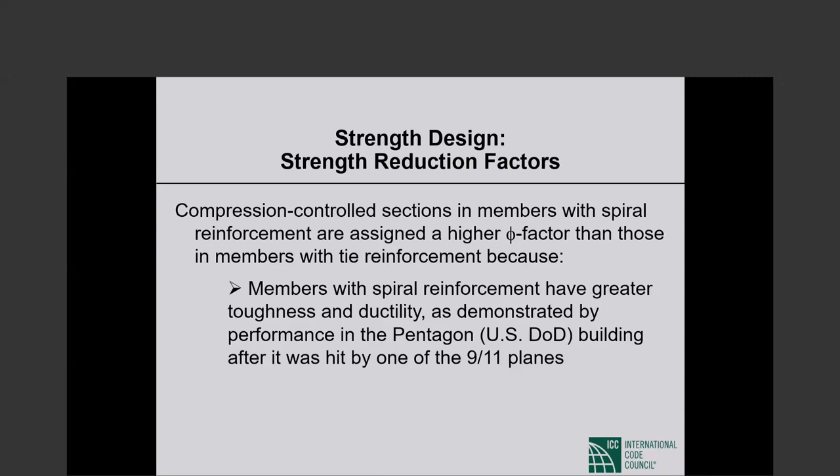And this was amply demonstrated when one of the 9/11 planes hit the Pentagon in 2001. Anyhow, you know this, the spirally reinforced column is more ductile, more deformable than a tied column, and this is why it deserves a higher phi factor.

The other phi factors, shear and torsion 0.75, bearing on concrete, post-tension anchorage zones, strut and tie models, which, yeah, anyway.

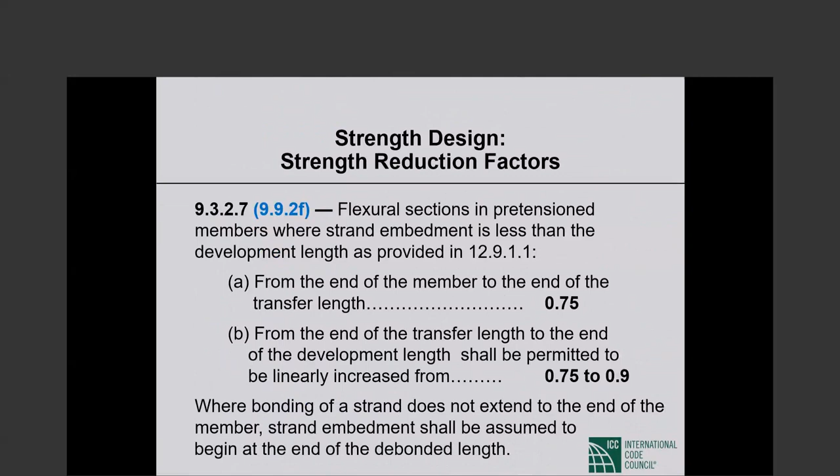It's approaching 10 o'clock, so I am not sure I want to go into this now.

So this is P for pre-stress member. I will skip these two slides—if you have any interest or a question, I'll come back. I don't have any problem; this is just to conserve a little time.

Safety margin is provided by a reduction in member strength by the phi factor, and an increase in the imposed loads by the load factor. We have both. So safety margin is the load factor divided by the strength reduction factor.

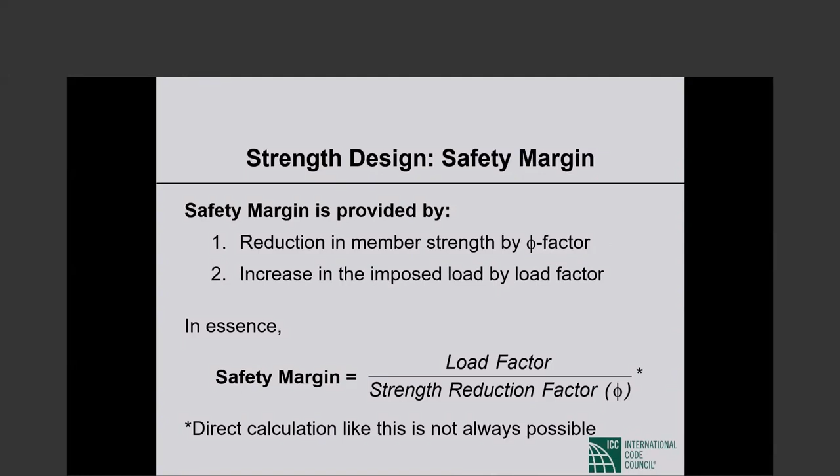Direct calculation like this is not always possible—actually it is seldom possible, but some of the time you can do that. So this is an example: design of a beam for flexural moment from dead load. That kind of simple case, you can do this kind of figuring.

So M sub u has to be less than or equal to phi times M sub n. M sub u is 1.4 times the bending moment caused by dead loads. ASCE 7 and BNBC tell you that 1.4 is the load factor if only dead loads are acting on your structure. Phi is 0.9 for flexure. So the safety margin in this case is 1.4 divided by 0.9, which is 1.56.

Load factors and strength reduction factors are provided after considering the probability of actual imposed loads exceeding, and member strengths falling short of, the respective design values, and the severity of failure if the above does happen.

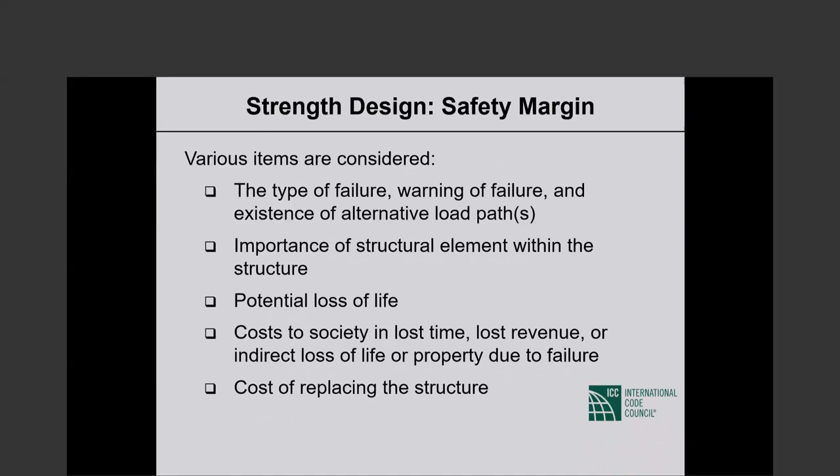There was pioneering work before we finalized the strength reduction factors, and the load factors come from ASCE 7, but even then ACI 318 used to modify them. Before we settled on the strength design basically found in ACI 318, which has been there since let us say 1971 when it settled down, it was based on pioneering work by Jim MacGregor.

In this paper, he says something I would like to throw in, and then probably it's better to move on. The ACI design requirements are based on an underlying assumption that the probability of understrength members is roughly 1 in 100, and the probability of overload is roughly 1 in 1,000. The probability of overload on an understrength member or structure is 1 in 100,000.

Load factors were derived to achieve this probability of overload—based on 1 in 1,000 members being overloaded. Based on the phi factor, and on values of concrete and steel strength corresponding to a probability of understrength of 1 in 100, the strengths of a number of typical sections were computed—the ratio of the strength based on these values to the strength based on nominal strengths of a member of a typical section.

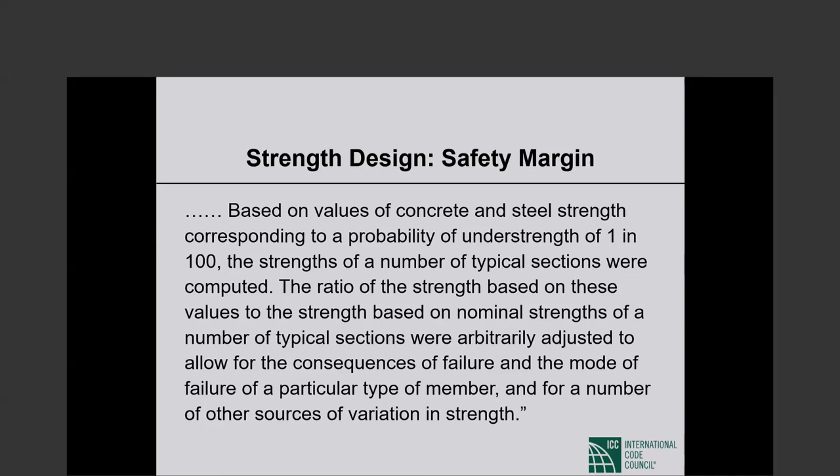Anyway, I'm not doing the best job of reading, I would let you read it. So Jim MacGregor, in that pioneering paper, gives you the basis for the load factors and the phi factors used in ACI 318.

The load factors are basically adopted from ASCE 7, which are also adopted by the IBC, International Building Code. You do not have multiple sources—you have the load combinations in BNBC, and I will go there.

A structural member is required to be designed for a number of combinations of the effects of various factored loads. Remember: loads, load effects, factored load effects, and then combinations of factored load effects, which is our required strength. I'll do it again.

We have service loads, service load effects, factored load effects, and then combinations of factored load effects, which is the required strength. Strength design load combinations are provided.

Notice I did not even mention ACI 318. In the US, because the load combinations are given in the IBC, those are the load combinations you must use in design. Those are based on ASCE 7, but when a code and a standard cover the same topic, you go with the code, not the standard. In your case, that problem doesn't arise. Your load combinations are in BNBC 2020 section 2.7.3. You have one place to go.

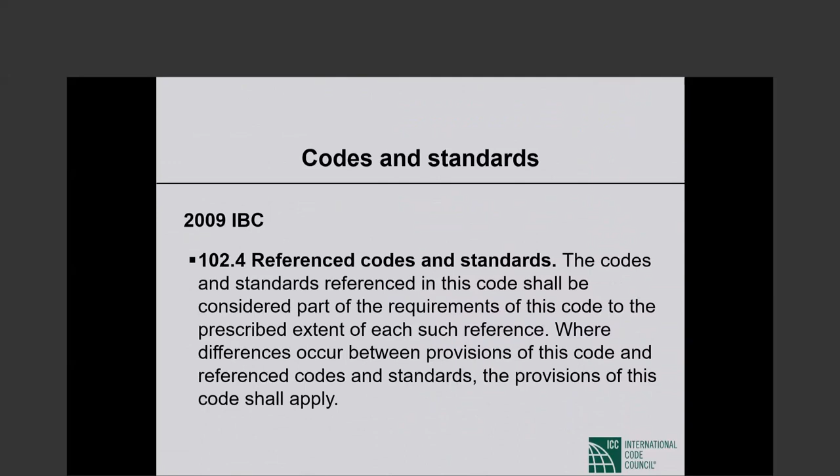Here I'm telling you that the code governs, not the standard. So these are the design load combinations of 2009 IBC and BNBC 2020. Same load combinations.

D is the effect of dead load. F is the effect of fluid pressure. T is typically called temperature effect, although that is a misnomer. So D is dead load effect, F is fluid load effect, T is effect of self-straining forces. That's a much better way of saying it. T stands for temperature, but it is the effect of restrained volume changes. That's what it is.

L, live load effect. H, effect of lateral earth pressure, very important. L sub R, roof live load effect. R, rain load effect. W, wind load effect. E, earthquake effect. So F is fluid load effect, T is effect of restrained volume change, H is effect of lateral earth pressure, and so forth.

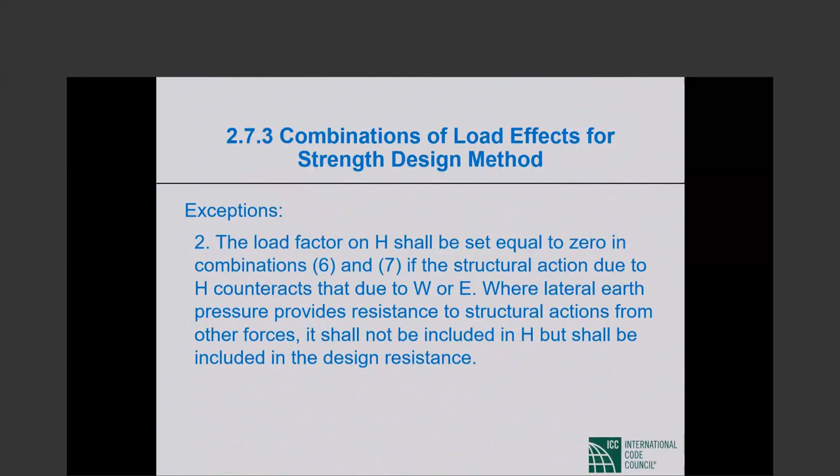Exception 3 talks about directionality of wind, and I will come to that in just a second. Directionality is coming right up.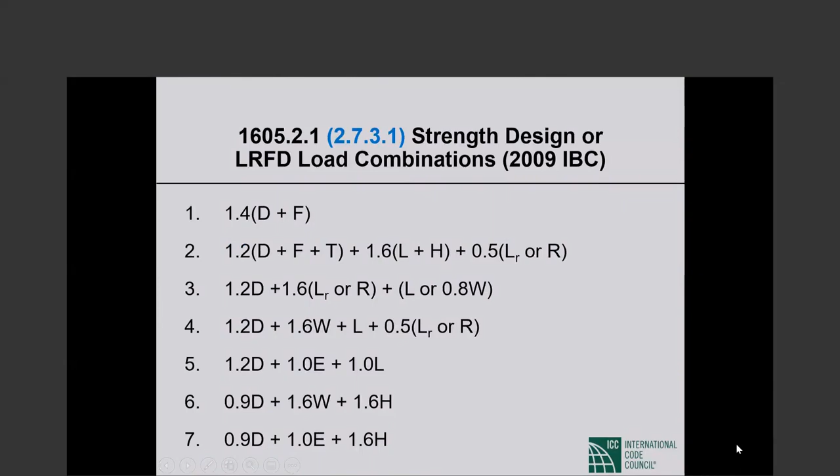Earthquake loads computed in accordance with 2009 IBC or BNBC 2020 are already at a strength level. This is why the load factor on E, earthquake effect, is 1.0 in the load combinations. If you noticed, the load factor on W, wind, is 1.6, while the load factor on E is 1.0. The load factor on E is 1.0 because E is already at a strength level.

Okay, this is BNBC, not ACI 318. When a structure is located in a flood zone or tidal surge zone, the following load combination shall be considered. In coastal zones vulnerable to tidal surges, 1.6W shall be replaced by 1.6W plus 2.0 F sub A, where F sub A is the effect of flood load, calculated according to BNBC 2020. In non-coastal zones, 1.6W shall be replaced by 0.8W plus 1.0 F sub A. These are BNBC provisions that are important for you to keep in mind.

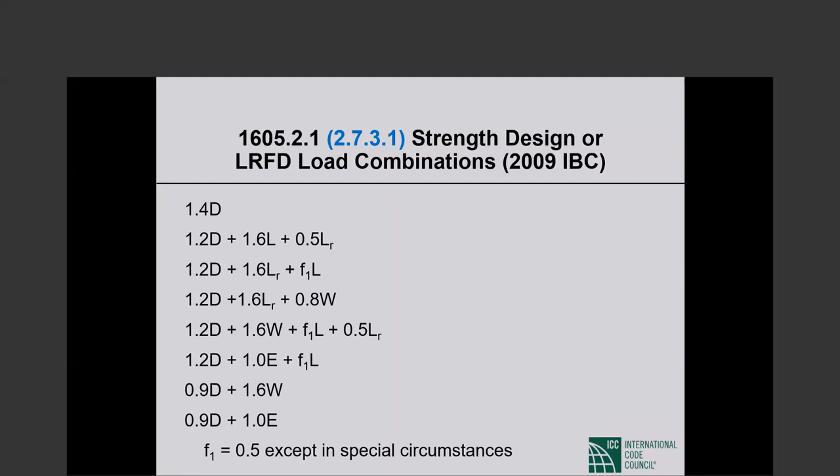For many members, the only loads considered are dead, live, wind, and earthquake. The F, H, R, S, T terms go away, and the load combinations get reduced to what you see in this picture. The F sub 1 load factor on the live load is an IBC creation. F sub 1 can be 0.5 or 1.0. As I mentioned, it is 0.5 unless you are designing a parking structure, a place of public assembly, or an area supporting more than 100 pounds per square foot of live load.

In addition to the possible variability of the specified loads, values of load factors are also assigned based on the probability of simultaneous occurrence of different load types. For example, the load factor on dead load alone is 1.4, which is higher than the load factor on dead load, 1.2, when other loads such as live load, wind, etc. are also present.

Now let us talk about the directionality of wind. You have seen that the wind load factor is 1.6. It used to be 1.3 earlier; it has changed to 1.6 now. That's in the future for you, but for you, 1.6 in BNBC 2020 at one point used to be 1.3. This will be the subject in one of our seminars after we are done with concrete, when I talk about wind.

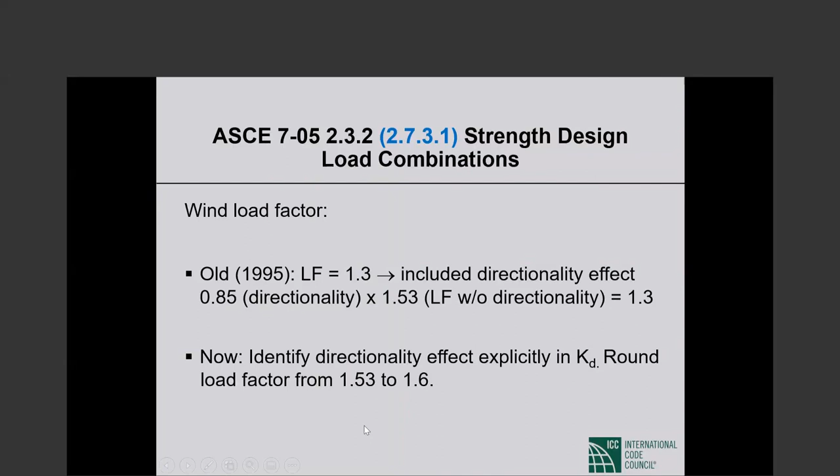Are you following me? 1.3 included a directionality factor of 0.85, but at one point in ASCE 7, 1998, ASCE introduced a separate directionality factor K sub D in the expression for wind pressure. So now the wind load factor had to be increased by the same directionality factor. The new load factor needed to be 1.3 divided by 0.85, which gives you 1.53. Instead of being rounded down to 1.5, it was rounded up to 1.6. That's the history behind 1.6.

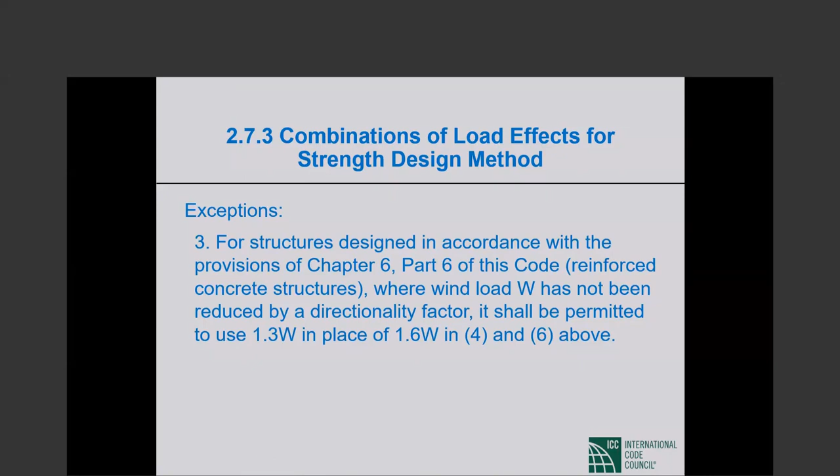And that brings us to exception number 3, which I skipped. Exception 3 says for structures designed in accordance with the provisions of such and such, where wind load has not been reduced by a directionality factor, it shall be permitted to use 1.3W in place of 1.6W. If wind does not include directionality, your wind load factor should be 1.3. If wind includes directionality, which it normally would if you calculate wind by BNBC 2020, then the proper load factor on wind is 1.6.

Now the seismic load combinations: additive, 1.2 dead, 1.0 live - which would typically be 0.5 live plus 1.0 E - and the counteractive, 0.9 dead plus 1.0 E.

Let me do it slightly differently than how the slides are. Let me do it the way it's in the IBC, and then I'll take you back to BNBC.

In seismic design, we start with the design base shear V. There are seismic modules coming up. We distribute V along the height of the structure as prescribed by the code, giving lateral forces at the various floor levels. We analyze our structure elastically under those floor level forces, the IBC notation for which is capital F sub X, X for floor level X. This analysis gives us bending moments, shear forces, and axial forces at the various critical sections of structural members.

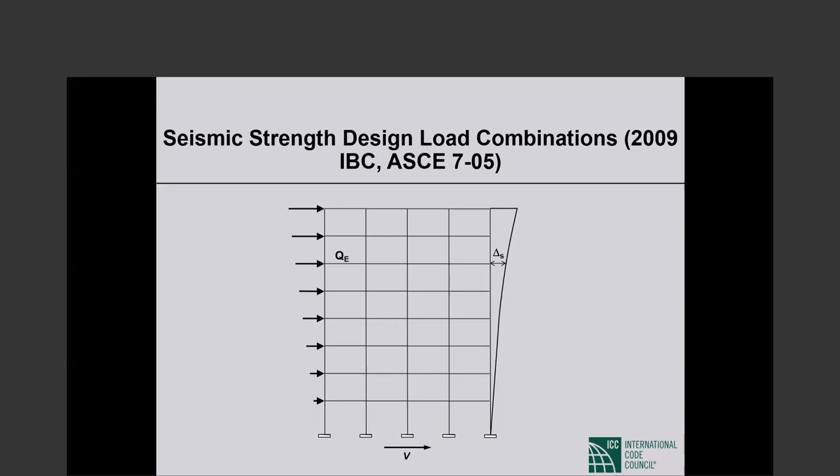The generic notation for those internal forces in the IBC is Q sub E. That's bending moment at a beam section caused by the horizontal earthquake forces. Q sub E is also shear at a beam section caused by the horizontal earthquake forces, and Q sub E is also axial force in a column section caused by the horizontal earthquake forces.

In the additive seismic load combination, 1.2 dead, 0.5 live, 1.0 E, the earthquake effect E is taken as the horizontal earthquake effect Q sub E amplified by a redundancy factor rho, and added to that is a vertical earthquake effect, taken as 0.2 S sub ds, the short period design spectral acceleration, times the design dead load. So the earthquake effect E is...

...the combination of horizontal earthquake effect and vertical earthquake effect. The horizontal earthquake effect is taken as Q sub E, as described earlier, multiplied by the redundancy factor rho, and the vertical earthquake effect is taken as 0.2 times S sub ds - which will be described in great detail in our seismic modules - times the design dead load.

Now, when we collect terms, what we get is 1.2 plus 0.2 S sub ds times D, plus rho times Q sub E, plus 0.5 L. So in this additive seismic load combination, we have increased the dead load factor from 1.2 to 1.2 plus 0.2 S sub ds by considering vertically downward earthquake ground motion. If S sub ds equals 1, the dead load factor is 1.4 instead of 1.2, in consideration of vertically downward earthquake effect.

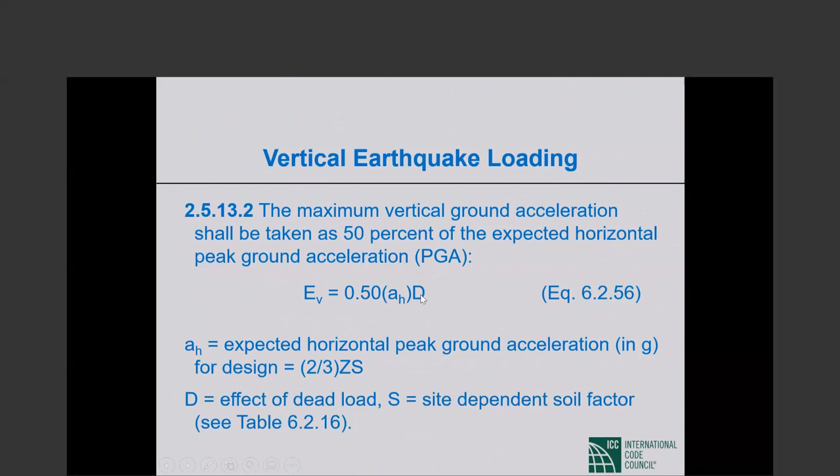BNBC exactly mirrors what is in the IBC, except that the vertical acceleration term is 0.5 times A sub H times D, and I'll explain that this is exactly equivalent to 0.2 S sub ds times D when I do my earthquake module with you. So what I described for the IBC is exactly the same in the BNBC: earthquake effect is a combination of horizontal and vertical earthquake effect. The horizontal earthquake effect is rho times the effect of the code-prescribed seismic forces, and the vertical earthquake effect is 0.2 S sub ds times D.

Okay, now I'm definitely beginning to run late, but I don't have a lot more to cover. Unified Design Provisions were first introduced in 318-95, moved to the main body in 2002. Since then, this is the way to design concrete, the Unified Design Provisions.

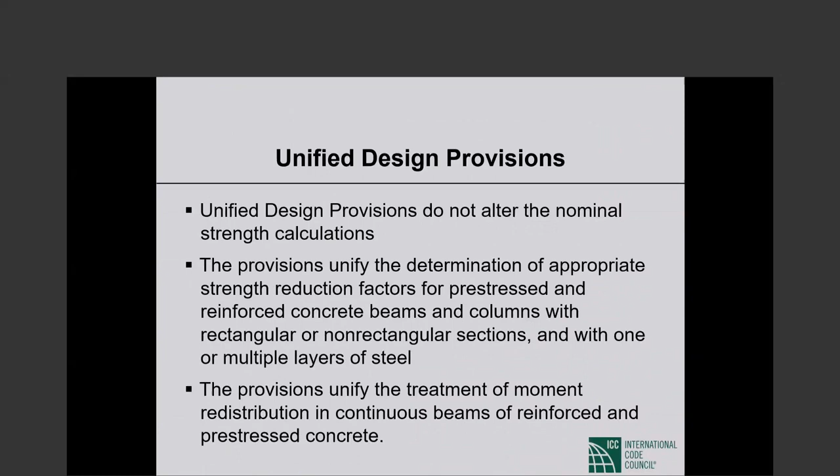318-02 is when unified design came into the main body of ACI 318. The edition before that was ACI 31899. In the slides I'm skipping, I go back to ACI 31899 to show how we failed to treat reinforced concrete and pre-stressed concrete beams and columns the same way, which in Bob Mast's mind was the justification for unified design. That's what I'm skipping.

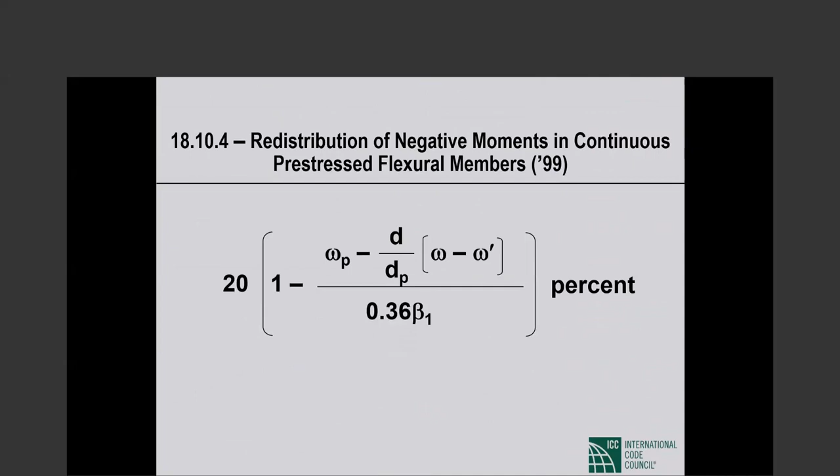For you, 99 ACI 318 does not make any difference, because your basis is 31808, much later. So I keep those slides in, but there are no consequences. Two things are important.

Prior to switching to unified design, where we have tension control sections with epsilon sub t of 0.005 or more, compression control sections with epsilon sub t of 0.002 or less, and transition sections, we used to have a maximum limit on tension reinforcement, which was 3/4 of rho balanced. Balanced reinforcement ratio is the reinforcement ratio that leads to yielding of the extreme tension reinforcement at precisely the same moment that the extreme compression fiber concrete reaches a strain of 0.003.

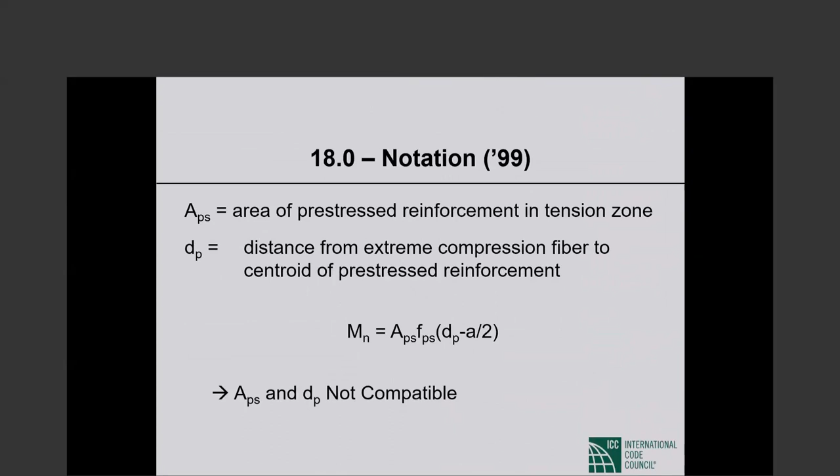So in a flexural member, with phi times P sub n not exceeding 1/10 f sub c prime A sub g, we could not place any more tension reinforcement than 3/4 of rho balanced. There was a pre-stressed concrete counterpart that I won't even get to. Keep that in mind.

So the maximum tension reinforcement ratio was 3/4 of rho balanced, and there were provisions for moment redistribution, which were quite different between pre-stressed concrete and reinforced concrete. Under unified design, we modified both, and this is what's of interest to you.

This is what is in 31808, and this is what is in BNBC 2020. So we are now talking about redistribution of bending moments, which applies equally to both non-prestressed and prestressed sections. The moment redistribution now is based on net tensile strain, epsilon sub t.

The percent redistribution allowed is 1000 times epsilon sub t. It doesn't matter if reinforced or pre-stressed - the moment redistribution you are allowed to take is no more than 1000 times epsilon sub t, and you cannot take any moment redistribution unless your epsilon sub t is at least 0.0075.

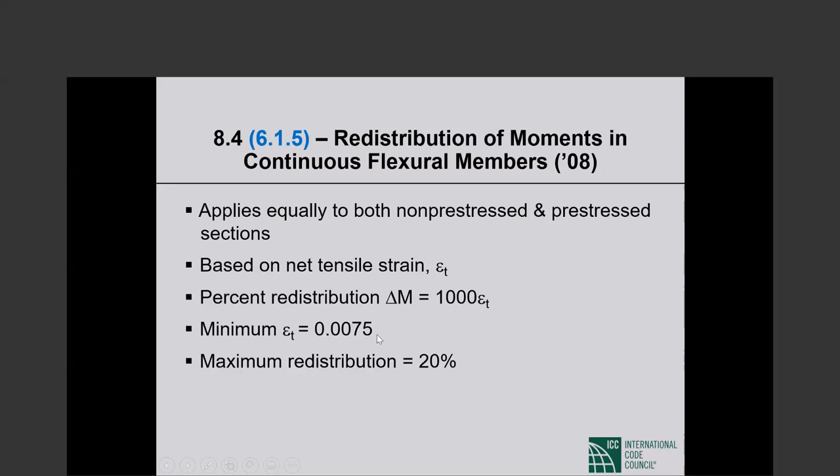Maximum redistribution you can take, irrespective of the value of epsilon sub t, is 20%. So the redistribution allowed is 1000 epsilon sub t. You cannot take any redistribution unless epsilon sub t is at least 0.0075, and the maximum you can take is 20%. Now, moment redistribution: you decrease the negative moment by delta m, in which case the positive moments will increase.

But unlike in older times, we are also allowed to decrease the positive moment by the same delta sub m, in which case we'll end up with more negative moment. It depends on the situation you are facing. If you want to decrease the negative moment, you take a redistribution on the negative moment. If you want to decrease the span moment, you decrease the span moment and the negative moment will go up. Both are allowed.

Moment redistribution may not be used for slab systems designed by the direct design method. There are two ways of designing two-way slabs: direct design method and equivalent frame method. If you're using the direct design method, then there is no moment redistribution.

So now, net tensile strain has to be at least 0.0075. As soon as it is 0.0075, we can take 7.5% moment redistribution, 1000 times 0.0075. We can go up to 20% for a net tensile strain of 0.02, and it remains there. We cannot go any higher.

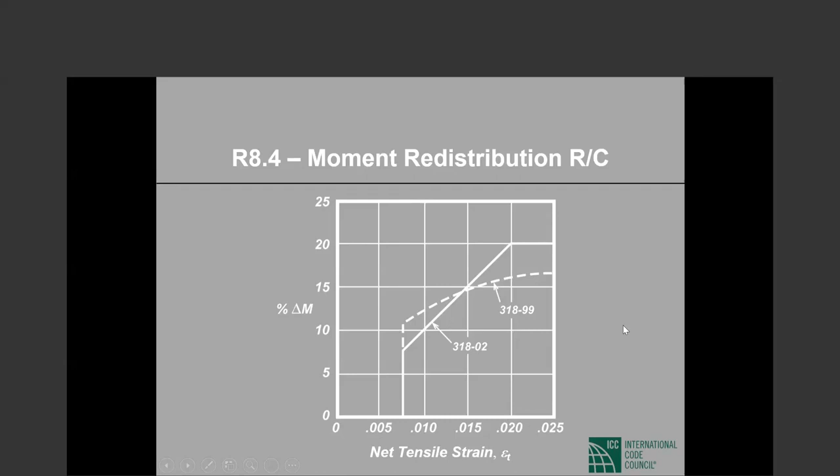This used to be ACI 31899 moment redistribution for reinforced as opposed to pre-stressed beams. For pre-stressed beams now there is no difference - the moment redistribution is, as I described, 7.5% at 0.0075, going up to 20% at 0.02. But the moment redistribution of 31899 was as shown here. So that is moment redistribution.

Now the maximum reinforcement - this is the last topic. Remember, we could not go beyond 3/4 of rho balanced.

Now we say for flexural members with P sub U, required axial load less than 1/10 F sub C prime A sub G, required axial strength less than 1/10 F sub C prime A sub G, net tensile strain shall not be any less than 0.004.

Tension control sections start at 0.005. We are not saying all flexural members have to be tension controlled, but we are saying that the net tensile strain cannot be any less than 0.004. This is extremely, extremely important.

This takes the place of rho maximum shall not exceed 3/4 of rho balanced. It replaces rho maximum less than or equal to 3/4 of rho balance that we used to require from the beginning of strength design. The new limit is slightly more restrictive.

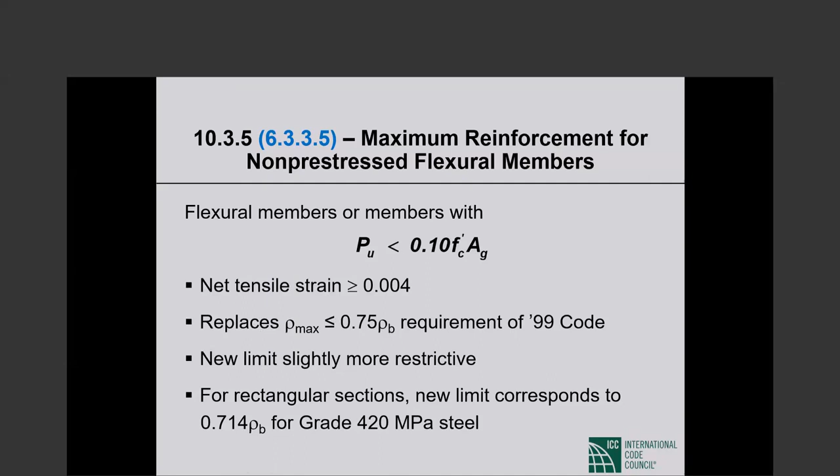For rectangular sections, the new limit corresponds to 0.714 rho balance rather than 75% of rho balance for grade 420 reinforcement.

Okay, and that's about as far as I need to go. Pre-stressed, I will not worry about. So it's not too bad.

10:30 was the target. It's 10:34 or so, so I have time for questions. So the first half was the material provisions, the second half strength design, and then I went to the unified design that is currently in the code.

Starting with 318-02, that definitely is what you have in BNBC 2020. The last two things I talked about: moment redistribution, I don't know, is terribly important because it is becoming increasingly uncommon to take moment redistribution. But the net tensile strain cannot be any less than 0.004 is vitally important in the strength design we do these days.

Now, starting with ACI 318-19, we have said all beams shall be tension controlled, but for you that is in the future, and probably in the far future, so I will not go there. For a long time to come, your practice will have to be: net tensile strain shall not be any lower than 0.004. Okay, thank you very much.